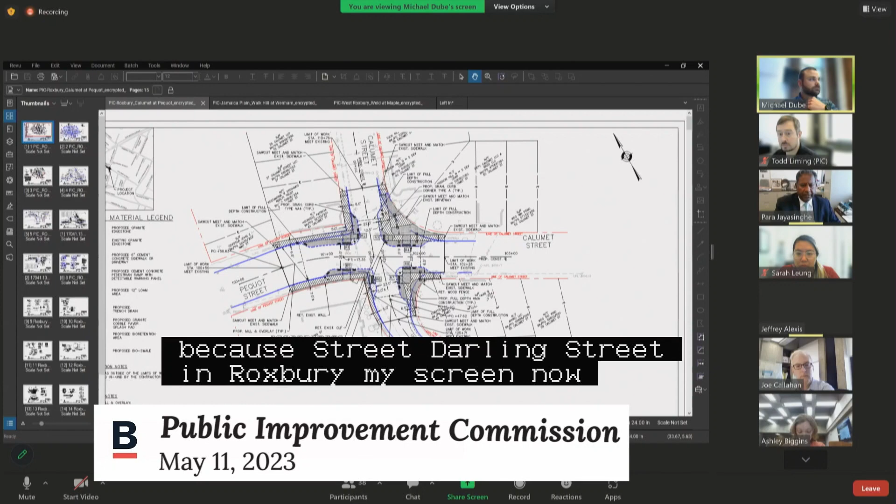Thank you, Jeffrey. Good morning, Commissioners. My name is Mike Dube with GPI, and I'll be presenting the specific repairs for the intersection of Calumet Street, Pequot Street, and Darling Street in Roxbury. I'll share my screen now. Can everyone see my screen? Yes. Perfect. So this project, as Jeff mentioned, proposes to improve pedestrian safety at this intersection by providing curb bump outs that minimize the pedestrian crossing distances and minimize the existing pavement footprint.

Within these curb bump outs, we have additional space for new sidewalks that we're proposing, new pedestrian ramps, green infrastructure with low ground cover and new plantings, and underground lighting infrastructure. These improvements provide a more defined intersection type that promotes safety at the intersection and accessibility for pedestrians. I'll open it up to any questions.

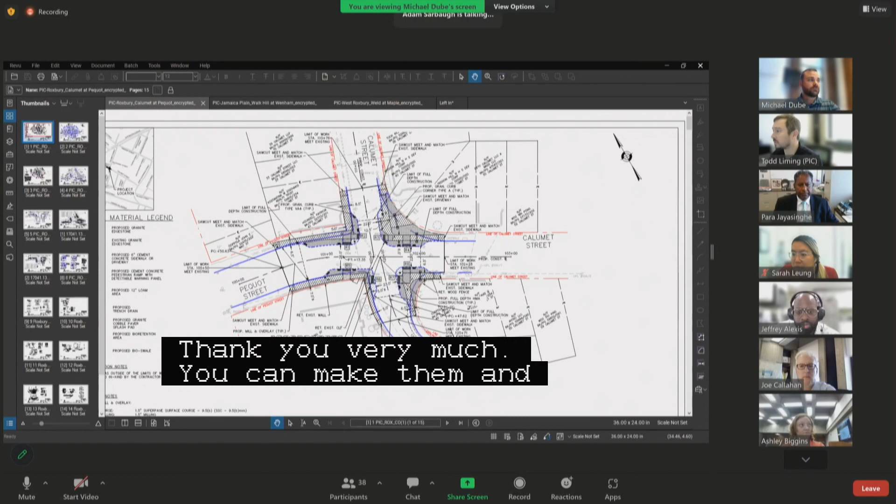Thank you very much, Commissioner. I was trying to wait till it was the public's turn. I'm speaking on behalf of Mission Hill Neighborhood Housing Services at 40 Calumet Street, the extreme low income property you referenced in the presentation. We've sent a couple emails to you, Jeffrey, and only recently reached out to hear about this project. We're respectfully requesting a deferral from any votes so we can have community input, understand how this affects us, and properly address concerns with the Public Works Department. Jeffrey, we did try to email you yesterday, but have not gotten a response back yet.

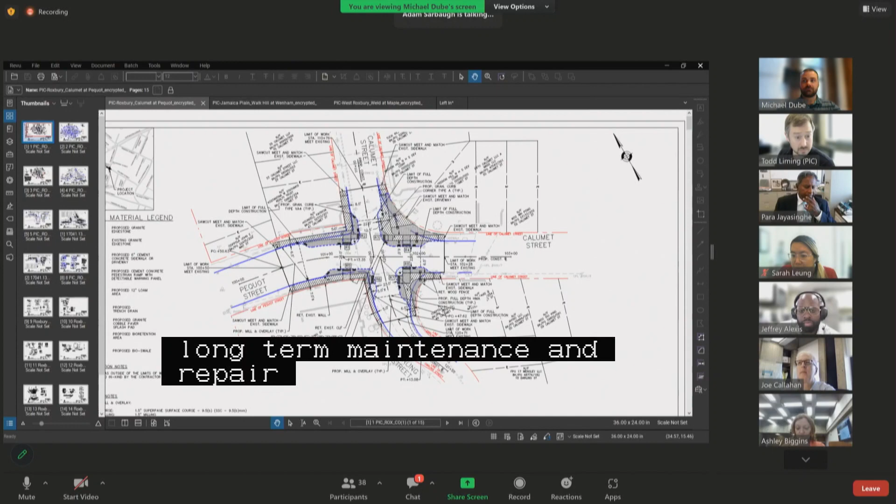Outside of the Neighborhood Housing Services board hat, as a Mission Hill resident, I want to go back to your presentation, Jeffrey, where you mentioned there's been a lot of constituent complaints about this intersection. My overall concern is the follow-up. I understand the intent of this design, but I'm curious what the city's and various departments' commitments are to long-term maintenance and repair. We have a similar example at the other end of Calumet Street, built with double sidewalks and landscaping in the middle, which I've addressed on numerous occasions since around 2017, maybe 2019 - the sidewalks were not getting shoveled because nobody knew whose responsibility it was. Parks took it on as a favor, but they won't commit to it in writing. So I'd like the commission to make sure, as we go through this, that everyone's follow-up responsibility is clearly addressed and committed once this is discussed and presented again.

So again, we really appreciate a deferral so we can have a community process with the Public Works Department. Thank you. Thank you, Adam. Allison, I believe you are next.

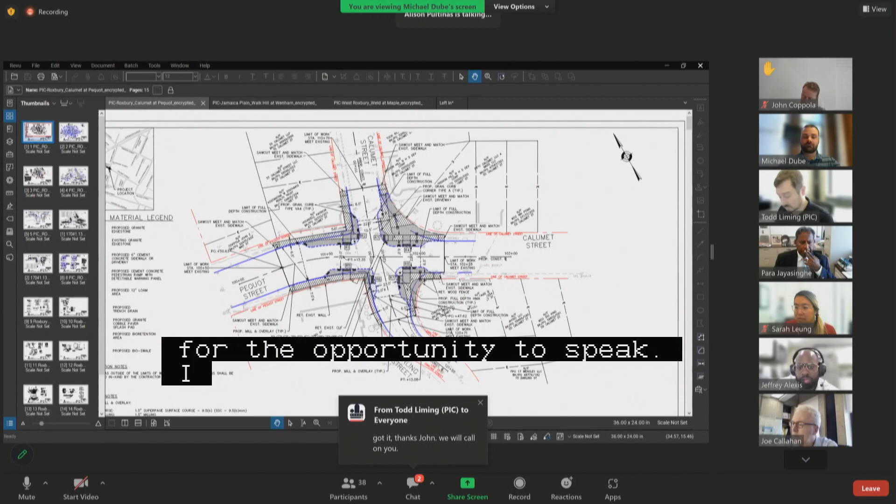Yes, hi, hello everyone, thank you for the opportunity to speak. I did become aware of these plans only recently and reached out to the Mayor's Office of Neighborhood Services to ask for more details. Green infrastructure is wonderful, but my concern would be who is responsible for maintenance and management. I just learned recently that with the Audubon Circle green corners at Park Drive and Beacon, the neighborhood association has to spend $15,000 a year to keep up those plants. So that is a big concern for me.

I am curious whether this will continue to be a four-way stop, and how that works with the sharp corners now for turning vehicles, and exactly where, if any, crosswalks will be painted. Thank you, Allison.

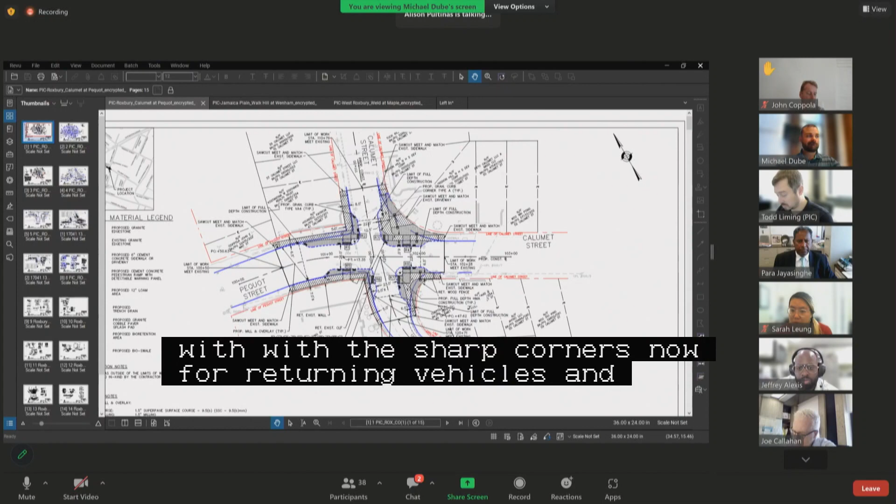Let me take your questions one at a time to the best of my knowledge. Your first question, Allison, was who is going to maintain the green infrastructure. I believe I can speak on behalf of the administration and the new team person managing this, Ms. Kate England - the city is going to maintain the green infrastructure. Unlike episodes in the past, where we had to rely or lean on the communities to help us, the city now has an active program to do the maintenance of green infrastructure. So that's good news.

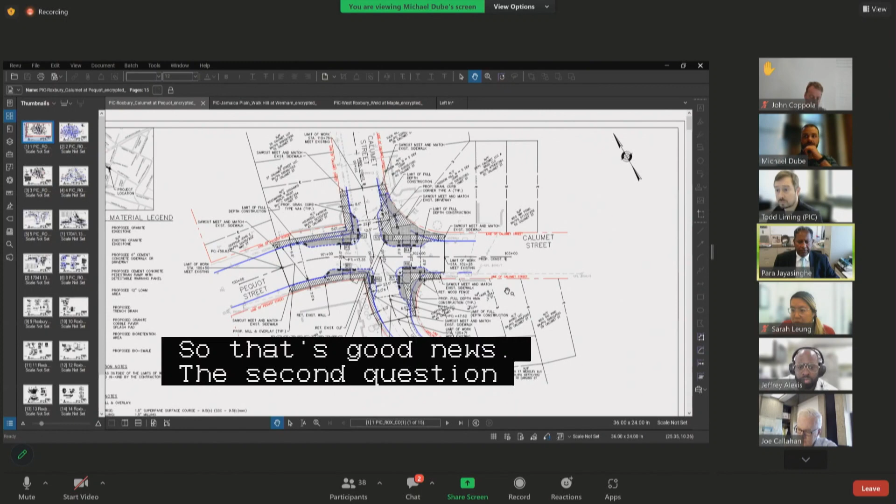The second question is whether this continues to be a four-way stop sign. I believe it is, but I will check with my design engineers to verify that. You can also show the crosswalk design, because I remember seeing that. Michael, could you respond to those two questions?

Yes, I can. So the design does propose to maintain the four-way stop. If you give me one second, I can pull up the striping to show the crosswalk locations. In general, the crosswalks will align with each of the new pedestrian ramps, labeled R1, R2, R3, R4. Within this set we just don't have the striping, so let me try and pull that up for you. So this is the intersection with the crosswalks shown. Thank you very much, Para.

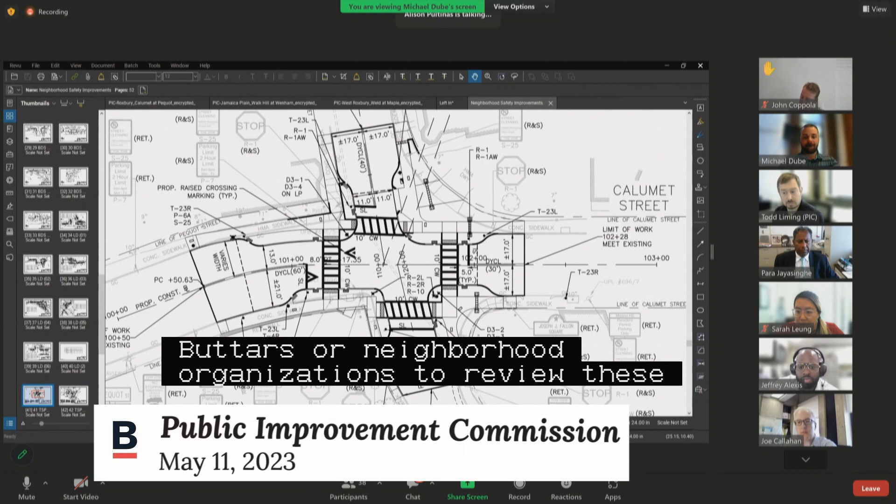I do want to say that there has been no public meeting with the abutters or neighborhood organizations to review these plans, so if possible I would ask Public Works to defer the vote. Also, Para, could you clarify what city department will be responsible for the planting maintenance - is that Public Works or would that be Parks? It's definitely not Parks, Allison - we have a new entity within the Streets Cabinet.

Within Jascha Franklin-Hodge, who is our Chief of Streets, it is embedded within the Streets Cabinet, a program that is looking to the deployment of green infrastructure, both from the design and maintenance standpoint. So I am confident to say, Allison, that it is in very good hands.

It is not just sound bites, this stuff is actually happening. And I hear your concern for a more robust public engagement, loud and clear.

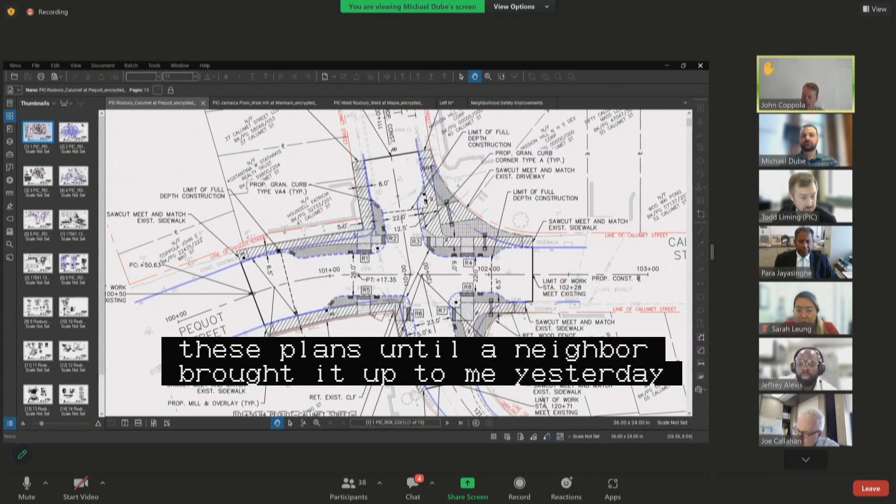I was kind of surprised as a direct abutter that I never received any information on these plans until a neighbor brought it up to me yesterday. That was the first I've seen, and I would like to request a deferral on a decision on this until we could spend a little bit of time on the plans.

I'm not in disagreement with them as a whole, but I would like to be able to have more than a few hours notice to be able to look at them and digest the work that is proposed.

I've seen some of this work by the city done very successfully, and I've seen other parts where they truly provide a danger to pedestrians, create issues with snow plowing and snow removal, and have long-time maintenance issues that the property owners, abutting property owners, have to take the place and do the upkeep on.

So that's, I guess I appreciate a deferral if possible.

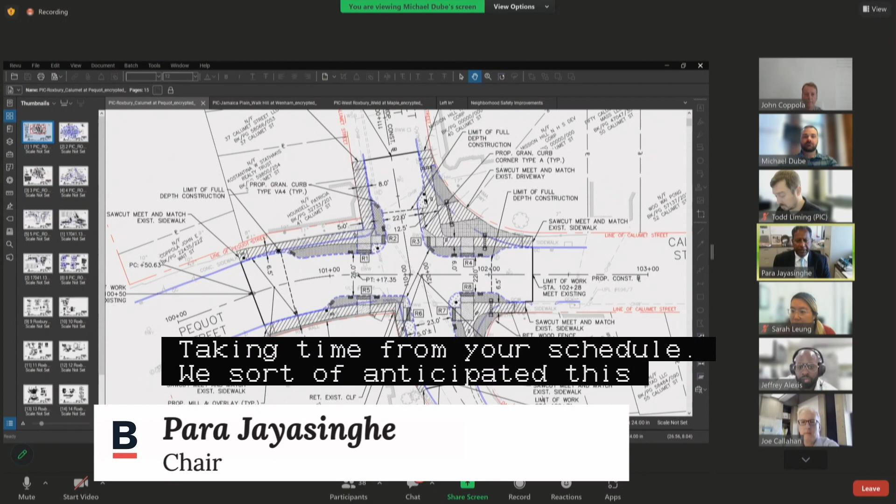Thank you, John. So here are my thoughts. First of all, Adam, Alison, John, I truly appreciate you joining us this morning, taking time from your schedule. We sort of anticipated this scenario, and I will take responsibility for the degree of outreach. It is not due to a lack of effort on our part, but it is the results that we all should be focusing on.

So here's what I recommend, if it is to be agreed by all the fellow commission members. We would like to host a Zoom meeting, okay? And with your agreement, yours meaning Adam, John, and Allison, we'd like to schedule this for May 23rd, and that would be a Tuesday.

May 23rd. I would prefer if we could do it a little bit sooner, but staff availability is making things a little bit challenging. So Tuesday, May 23rd, 6 p.m. We want to have a more engaged conversation per your request. It'll be a Zoom online meeting, as this is a public hearing.

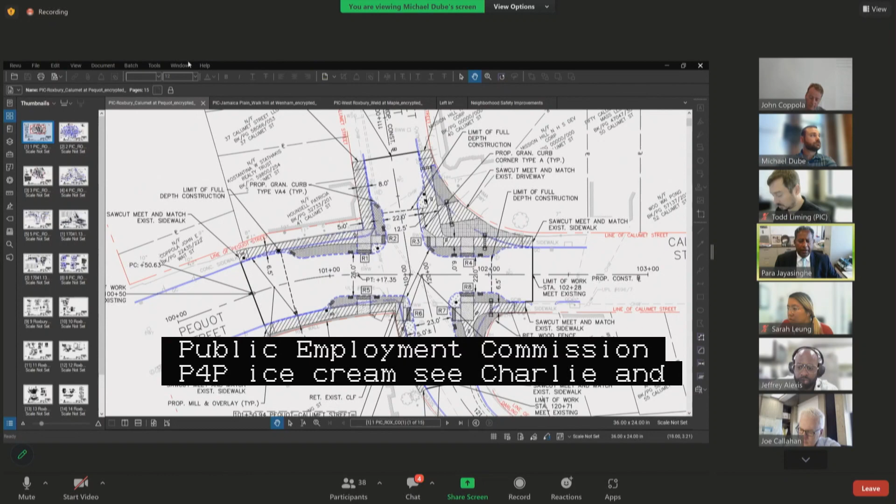And what I would like you to do is to send us your email address. I'm going to give you 2 email addresses. One is a very short and precise email address. It is PIC for Public Improvement Commission. P for Peter, I for ice cream, C for Charlie, at boston.gov. I will also give you my staff person Jeffrey Alexis's email, but I think PIC at boston.gov should be very precise.

Now, if you could be ever so kind and send us an email to that address, this way Jeffrey can email you directly with the Zoom link for Tuesday, May 23rd at 6 p.m., with the full intention of hearing your concerns, explaining this design in more detail, which will allow us to have that conversation. This will require us postponing the public hearing until the next proper hearing, because we have a hearing on the 25th, which is just 2 days after our Zoom meeting.

I would prefer to postpone this for 5 weeks, which is the following subsequent PIC hearing of June 25th. Does that arrangement work for those who've taken time from your schedules? And John, I will ask you first, and I'll go in reverse order. Does that work for you, John?

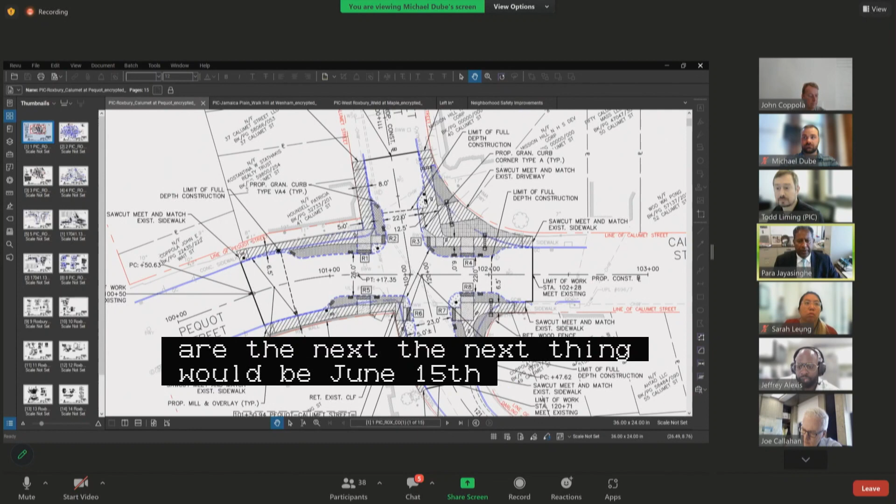Sorry to cut in, but the next hearing would be June 15th, not the 25th. Yes, yeah, that way, sorry, did I mess up? June 15th. So John, does that work for you?

That does, and I do appreciate the opportunity to be able to look at these plans and work with the city for a positive improvement to this intersection. Thank you, John.

And when we share the Zoom link with you, after you send us your email address, please feel free to share it with your abutters or your neighbors. So next is Allison. Allison, does that work for you?

Yes, thank you, and I will share it with others. Thank you, Allison. I truly appreciate everything that you do in our neighborhoods. And Adam, Mr. Sabor, does that work for you, sir?

Yes, I appreciate you hearing us and deferring it so that can happen. We will also work with Allison and John to address some of the topics for that meeting, so it's not a blind meeting for you guys. We can give you some of the topics, concerns, or comments that have come out so we can make it a productive Zoom. Thank you very much for that.

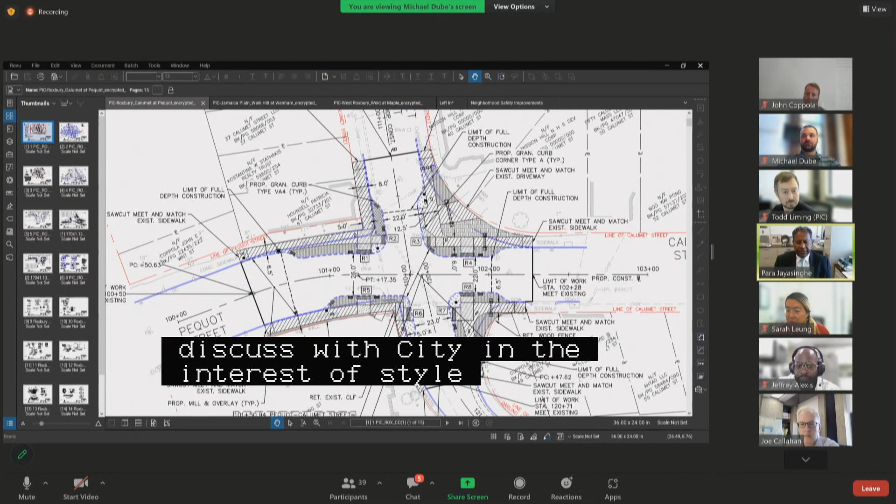So I'm going to ask a small favor. This meeting, which we are proposing for May 23rd, as much as there may be many things you all want to discuss with the city regarding staff allocation and resources, I would appreciate if the focus of the meeting can be towards this public hearing. We will make sure a representative from the Mayor's Office of Neighborhood Services is there to follow up on your broader issues. I just want to keep moving forward with this task, because as someone said, it is in need of attention, and we are eager to implement the steps needed to address it.

So, I'd like to hear a motion to continue this public hearing for 5 weeks to June 15th. I'll make a motion to continue public hearing item number 1 till June 15th. Second. All in favor? Aye. Anyone opposed or abstained? Hearing none, motion passes. Again, my appreciation to Adam, John, and Allison for joining us today.

Moving on to public hearing number 2, on a petition by the City of Boston Public Works Department for specific repairs within public ways in Jamaica Plain, consisting of curb realignment, roadway and sidewalk reconstruction, new and relocated pedestrian ramps, street lighting infrastructure, street trees, storm drain infrastructure, landscaping, green storm water infrastructure, and raised crosswalks, specifically at Walk Hill Street at Wenham Street. This was brought under new business on April 27th of this year, as shown on plans entitled City of Boston Public Works Department Engineering Division Specific Repair Plan, Walk Hill Street at Wenham Street, Jamaica Plain, 12 sheets dated April 20th, 2023.

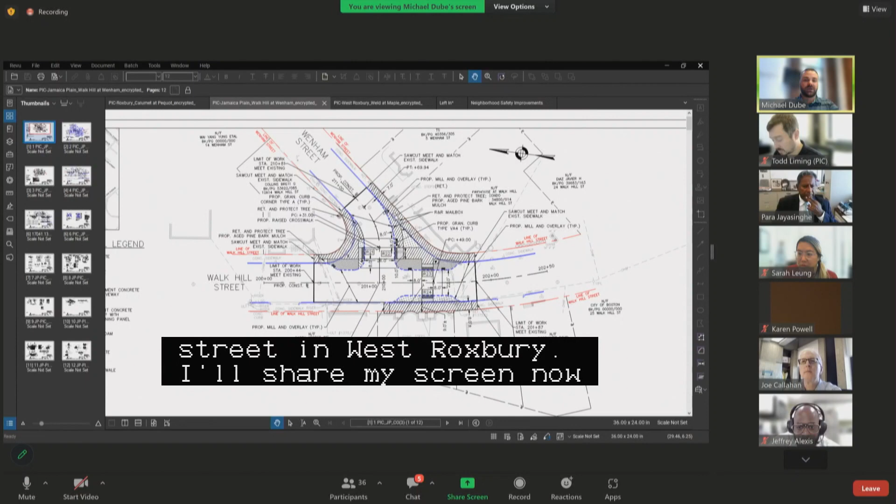This project proposes to improve pedestrian safety and overall safety at the intersection by minimizing crossing distances through proposed curb bump outs on either side, which also minimize the total pavement width. This design also proposes new cement concrete pedestrian ramps, new cement concrete sidewalks, and raised crossings for traffic calming and pedestrian safety. The additional space within the proposed curb bump outs will be used for green infrastructure with plantings and low ground cover, and we're also proposing new lighting infrastructure aligned with the new curb lines. Overall, these improvements will provide a safer intersection design. I'll open it up for questions or comments.

Thank you, Michael. Any questions by fellow commission members?

Hearing none. Any concerns or comments by PIC staff? No issues here. I'll give the public a minute in case anyone wants to weigh in. Thank you, Mr. Liming. Any comments by members of today's audience? As Mr. Liming mentioned, you can use the raise hand feature.

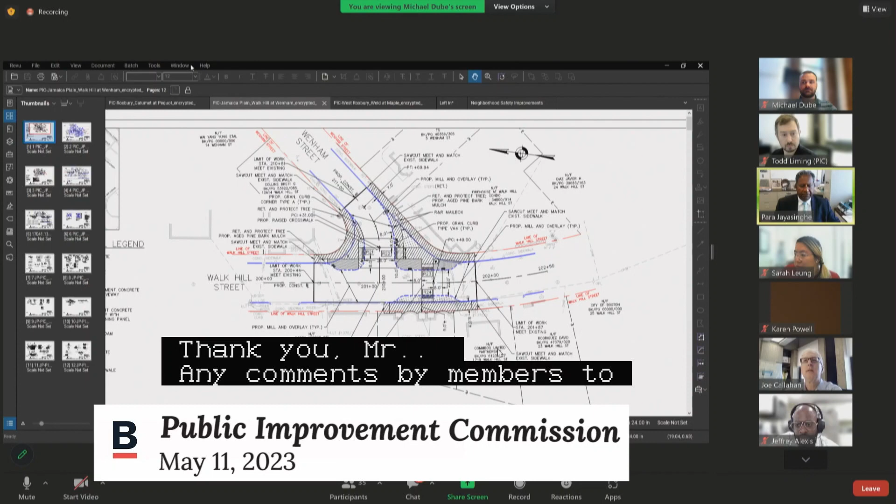Seeing or hearing none, I'd like to hear a motion regarding public hearing number 2. I'll make a motion to approve a petition by the City of Boston Public Works Department for the making of specific repairs in Walk Hill Street and Wenham Street as read into the record by the chair. Second. All in favor? Aye. Anyone opposed or abstained? Hearing none, motion passes.

Public hearing number 3 on a petition by the City of Boston Public Works Department for the making of specific repairs within the following public ways in West Roxbury, consisting of curb realignment, roadway, sidewalk, and driveway curb cut reconstruction, as well as new and relocated pedestrian ramps, street lighting infrastructure, storm drain infrastructure, street trees, landscaping, green stormwater infrastructure and raised crosswalks. Weld Street at Maple Street at Pomfret Street. This was brought under new business on April 27th of this year, as shown on a set of plans entitled City of Boston Public Works Department Engineering Division Specific Repairs Plan, Weld Street at Maple Street, West Roxbury, 19 sheets dated February 9th of 2023.

Jeffrey? Yes, thank you. Once again, good morning, everyone. Chairman, members of the commission, my name is Jeffrey Alexis, Public Works Engineering, petitioning for the specific repairs at the intersection of Weld Street at Maple Street and Pomfret Street. Also joined by our design consultant from GPI, who will provide a little bit more background information on this project.

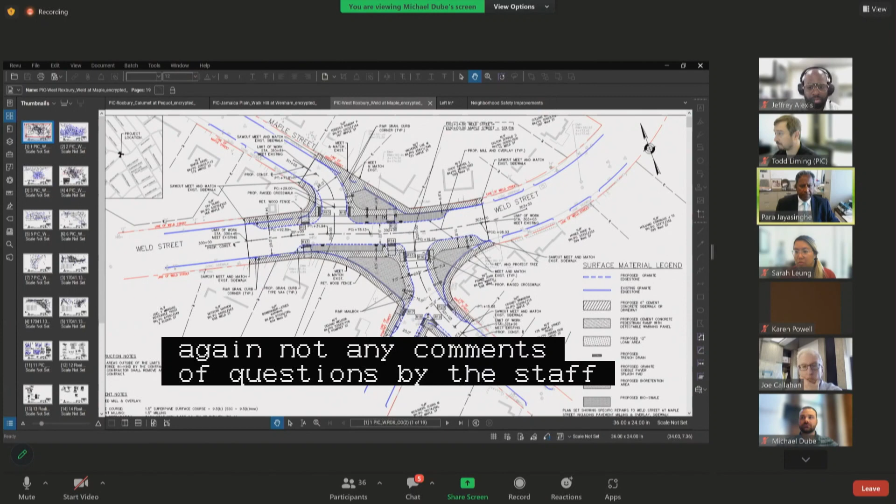Thank you, Michael. Any comments or questions by fellow commission members? Hearing none, any comments or questions by PIC staff? All set. Any comments by members of today's audience? Seeing none, Jeffrey and your team, I applaud you all for doing these type of improvements so that the livability of our neighborhoods is improving, and I commend you all for this type of work.

I'd like to get a motion regarding public hearing number 3. I'll make a motion to approve a petition by the City of Boston Public Works Department for the making of specific repairs in Weld Street, Maple Street, and Pomfret Street as read into the record by the chair. Second. All in favor? Aye. Anyone opposed or abstain? Hearing none, motion passes.

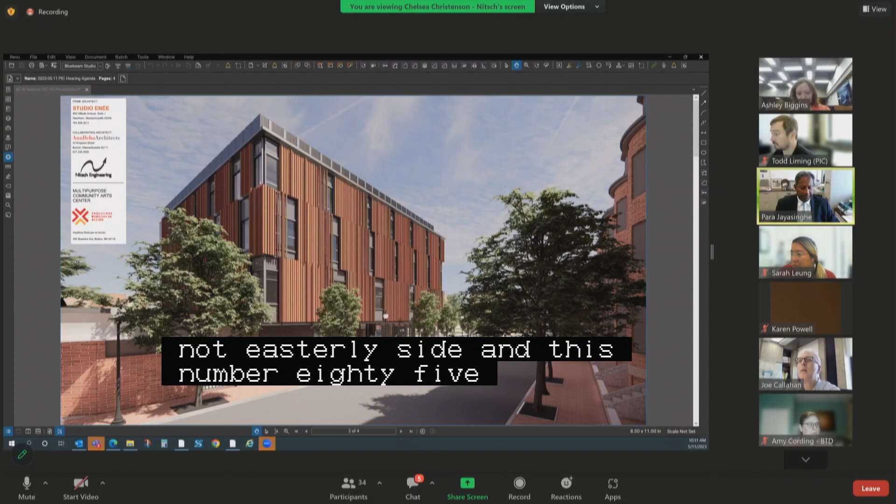Public hearing number 4 on a petition by IBA Real Estate Support Corp for the acceptance of a pedestrian easement adjacent to West Newton Street, which is a public way, Boston proper, located on its northeasterly side at address number 85, generally southeast of Tremont Street. This was brought under new business on April 27th of this year, as shown on a plan entitled City of Boston Public Works Department Engineering Division Pedestrian Easement Plan 85 West Newton Street Public Way South End, one sheet dated April of 2023. Good morning. If the petitioner can identify and introduce themselves.

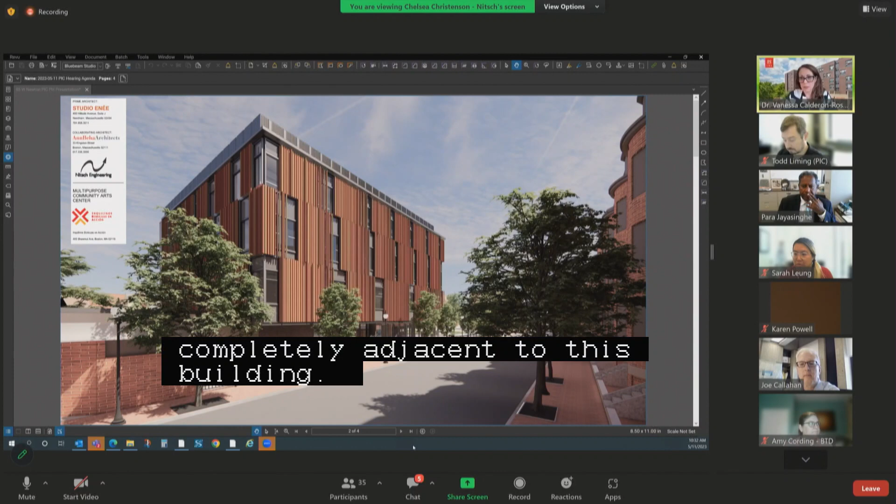My name is Vanessa Calderon Rosado, Chief Executive Officer of IBA, Inquilinos Boricuas en Acción, the owner of the property and the proposed project we're presenting today. IBA is a nationally recognized community development corporation. We own 667 units of affordable housing, primarily in the South End in the Villa Victoria community, completely adjacent to this building, where the proposed programs and services housed in this building, which we call the CASA, Center for Arts, Self-Determination and Activism, will directly benefit the low-income families that live in our properties, as well as benefit the larger South End neighborhood and City of Boston by providing affordable art space for artists, as well as community gathering spaces.

Here today we have Chelsea Christenson from Nitsch Engineering and Michael Schambacher from Studio ENÉE, one of the architects on the design team for this project. Let me turn it over to them for the presentation, and thank you for your time. Thank you, Vanessa. Good morning, Chelsea Christenson from Nitsch Engineering on behalf of IBA Real Estate Support Corp.

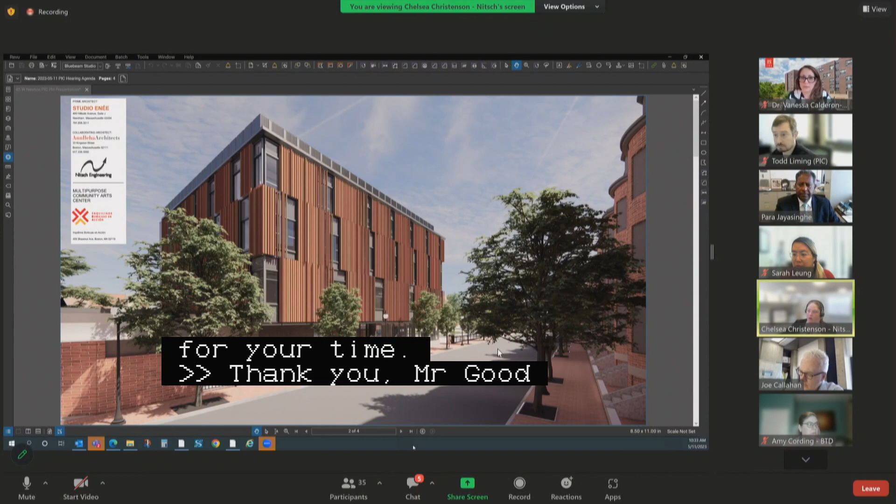The pedestrian easement we are requesting is associated with sidewalk improvements along 85 West Newton Street, as shown here. Our site is located on this currently vacant lot between Tremont Street and Shawmut Avenue along West Newton Street. The pedestrian easement itself is a little less than 4 feet wide along the length of the proposed building. We have since added a section showing where the easement line lands relative to the property line and the proposed building. So there is an overhang within the easement, but not over the property line.

Any questions for Ms. Christenson or Chelsea by fellow commission members? Hearing none, any comments or questions by PIC staff? All set. Thank you for adding that detail to the plan, Chelsea. Any comments by members of today's audience?

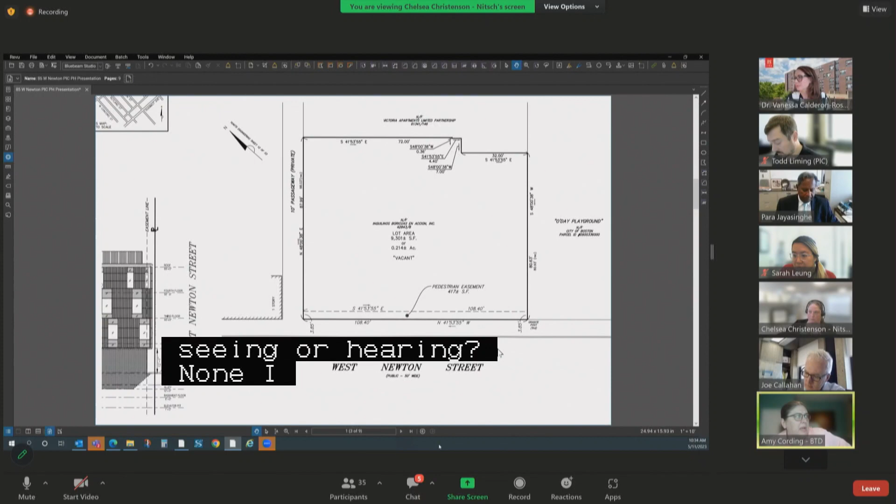Seeing or hearing none, I'd like to hear a motion regarding public hearing number 4. I'll make a motion to approve a petition by IBA Real Estate Support Corp. for the acceptance of a pedestrian easement on West Newton Street, as read into the record by the chair. Second. All in favor? Aye. Aye. Anyone opposed or abstain? Hearing none, motion passes. Public hearing number 5 on a petition by IBA Real Estate Support Corp.

For the making of specific repairs within West Newton Street, a public way, Boston proper, located on its northeasterly side at address number 85, generally southeast of Tremont Street, consisting of sidewalk reconstruction, as well as new and relocated specialty pavement, street lighting infrastructure, street tree pits, and bike racks. This is brought under new business on April 27th of this year, as shown on a set of plans entitled City of Boston Public Works Department Engineering Division, Specific Repair Plans 85 West Newton Street, Public Way South End, 2 sheets dated April of 2023.

Thank you again, Mr. Chairman. This is Vanessa Calderon again on behalf of IBA. I will turn it over to Chelsea. Thank you, Vanessa. Chelsea Christenson, Nitsch Engineering on behalf of IBA Real Estate Support Corp.

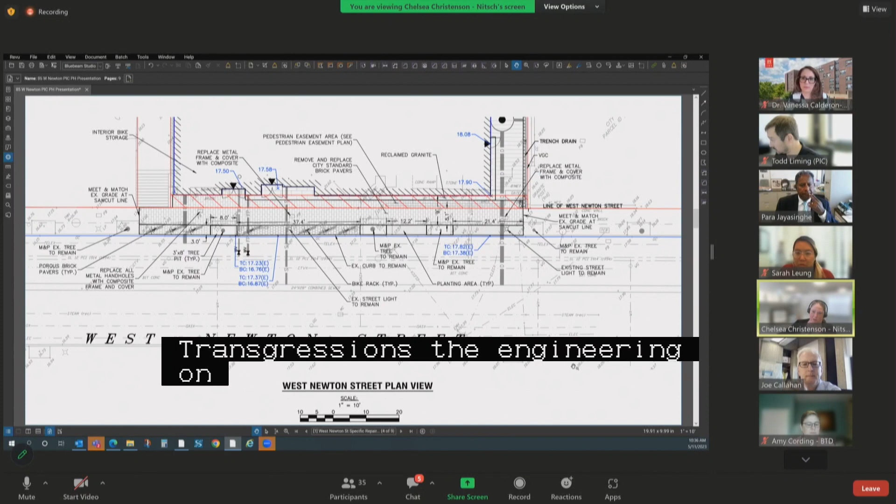Our proposed specific repairs include reconstruction of the existing brick sidewalk using city standard brick material, a porous brick strip along the westernmost frontage zone, including new bike racks. Since the new business meeting, we have angled the bike racks to allow more space for green infrastructure. So the current plan proposes these areas between the tree pits along the east side would be planted green infrastructure, and we'll continue to work with Kate England on what exactly that material will be. I should have mentioned earlier, this is O'Day Playground over here, and so we thought the best place for the greenery would be closer to that area of the playground.

Existing trees and existing streetlights will remain, and here you can see the pedestrian easement that was discussed in the previous action. Thank you, Chelsea. Any questions for Ms. Christenson by fellow commission members?

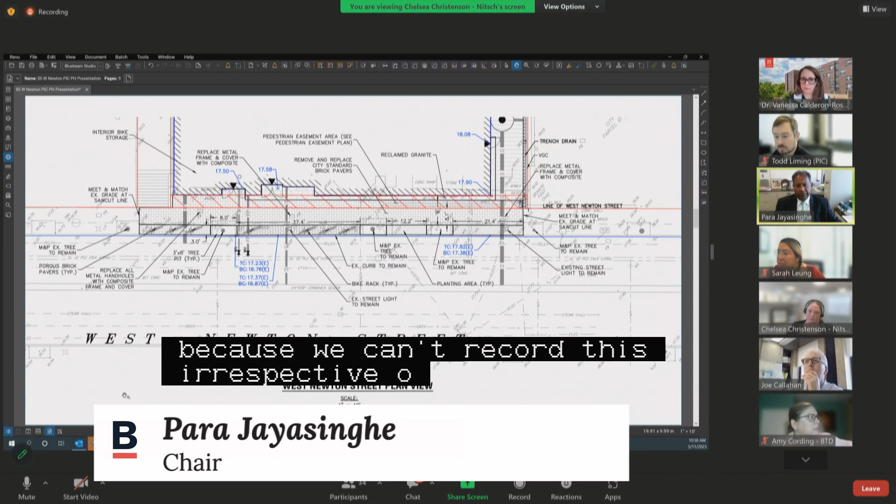Any comments by PIC staff? No, all set. Any comments by members of today's audience?

Hearing none, I'd like to hear a motion regarding public hearing number 5. Make a motion to approve a petition by IBA Real Estate Support Corp for the making of specific repairs within West Newton Street as read into the record by the chair. Second. All in favor? Aye. Anyone opposed or abstain? Hearing none, motion passes. Thank you, Vanessa.

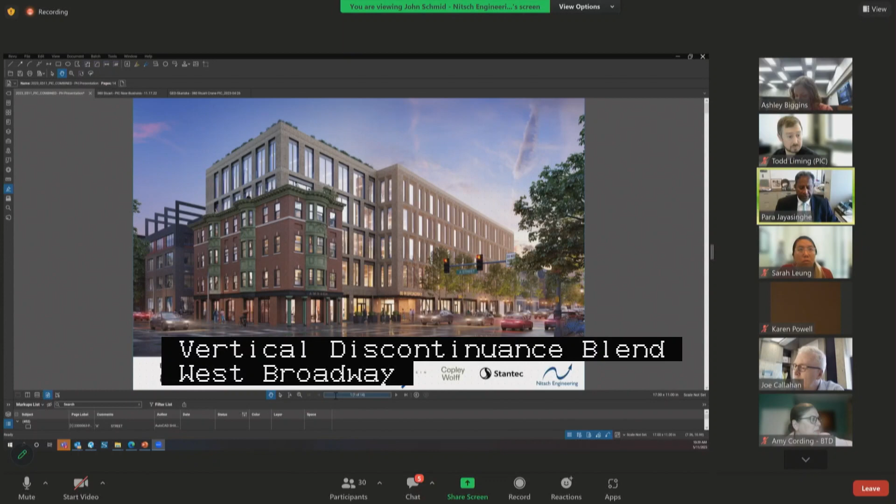We want to give a brief introduction to the project. I know we met with you guys two weeks ago, but we'll give an introduction for those who weren't at that last meeting. West Broadway is a 5-story office building, and we are also keeping the existing facade of the Amrheins building on the west and south side. We also have activation on the ground floor with some mixed use, and we're hoping to retain the Amrheins restaurant on the southwest side of the building. We also have a proposed tenant that will go in the center of the building on the ground floor. We have a small parking garage, about 23 spaces, on the southeast side of the building, and we're about 87,000 square feet of gross floor area as a mixed-use office building to revitalize this neighborhood.

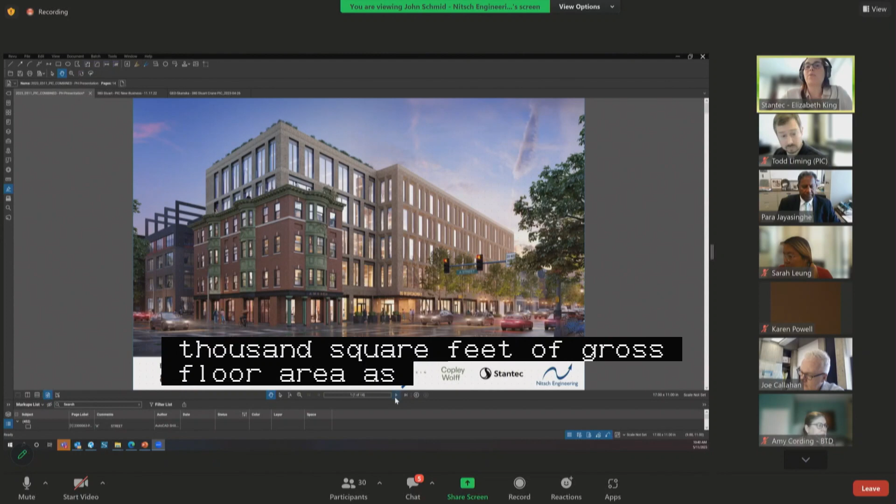We're doing some significant repairs to the pedestrian and public realm streetscape as well. We're also providing an 800 square foot community space on the ground floor, and we're targeting LEED Gold for this project. One of the big drivers for our client team is really striving to think about embodied carbon and carbon analysis for the building, and we're going with a full mass timber structure. That's something the client is passionate about, and we as a team are really excited about for the city of Boston.

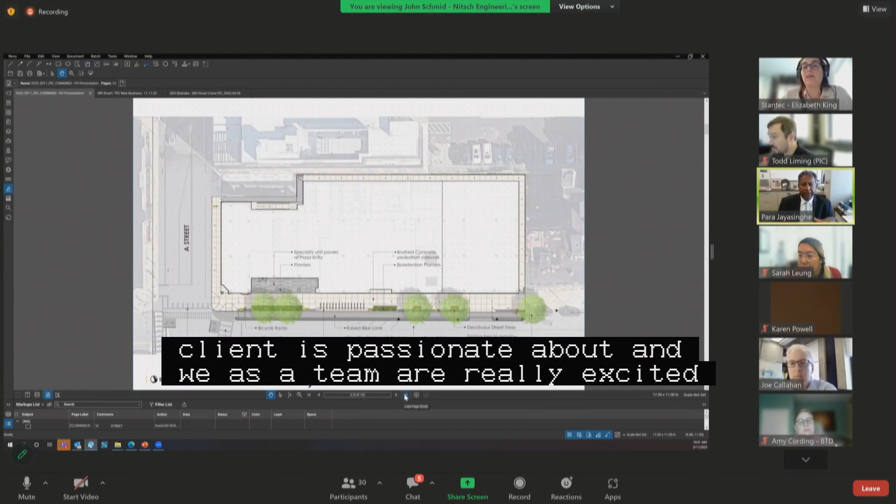I'm going to hand it over to the next slide, where our Copley Wolff landscape architect will walk through the site materials. Elizabeth, if you could ask your team to just focus on the vertical discontinuance part, and then we can pick up the rest of the stuff, because there are multiple hearings associated with your project.

Good morning, John Schmidt with Nitsch Engineering. I'll speak to the vertical discontinuances. They are required in order to provide space for the existing facades that are being retained and reconstructed for this construction, as you saw in the initial visual. These are the existing projections over the public way, and they are being maintained for the redevelopment of this parcel. The facades are greater than 30 feet above grade. Essentially, that's the gist of it. The appraisal is underway and being reviewed, and it should be completed shortly.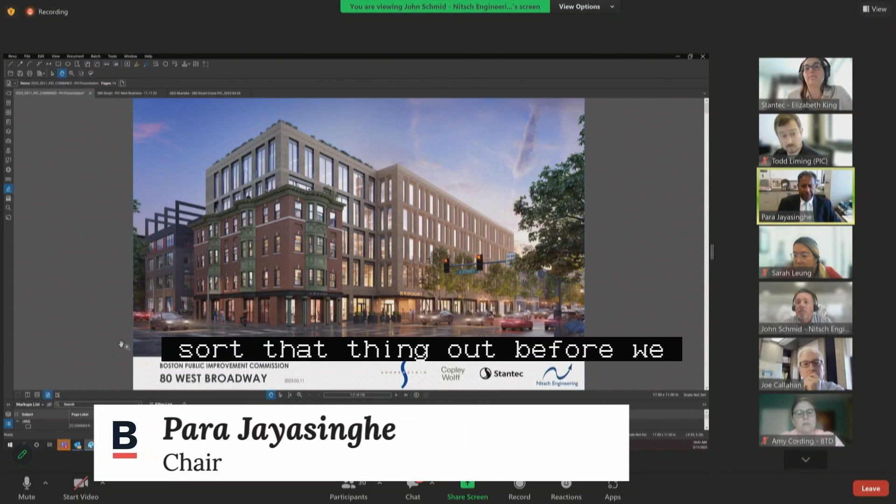Thank you, John. If the team recognizes that we need to finalize that appraisal before we can file these with the registry, so independent of how the hearing goes, hopefully you can convey to the client that we need to sort that out before we can take final action on recording this. John, that's understood, right? Yes, I believe so. There have been numerous emails this morning, and we understand that the project cannot proceed further until the appraisal has been worked out between both parties.

Awesome, thank you. Any questions or comments by fellow commission members regarding the discontinuance portion of this hearing? Hearing none. Any comments by PIC staff?

No, all set, thanks. Any comments by members of today's audience? Seeing or hearing none, I'd like to hear a motion regarding public hearing number 6.

I'll make a motion to approve a petition by 80 West Broadway Operator LLC for the vertical discontinuance of portions of West Broadway and A Street as read to the record by the chair. Second. All in favor? Aye. Anyone opposed or abstain? Hearing none, motion passes.

Moving on to public hearing number 7 on a petition by 80 West Broadway Operator LLC for the making of specific repairs within the following public ways in South Boston, consisting of curb realignment, roadway and sidewalk reconstruction, as well as new and relocated pedestrian ramps, specialty pavement, street lighting infrastructure, street trees, landscaping, irrigation infrastructure, green stormwater infrastructure, storm drain infrastructure, bike racks, driveway curb cuts, and protected bike facilities. All of these on West Broadway at address number 80, generally southeast of A Street, generally northeast of West Broadway.

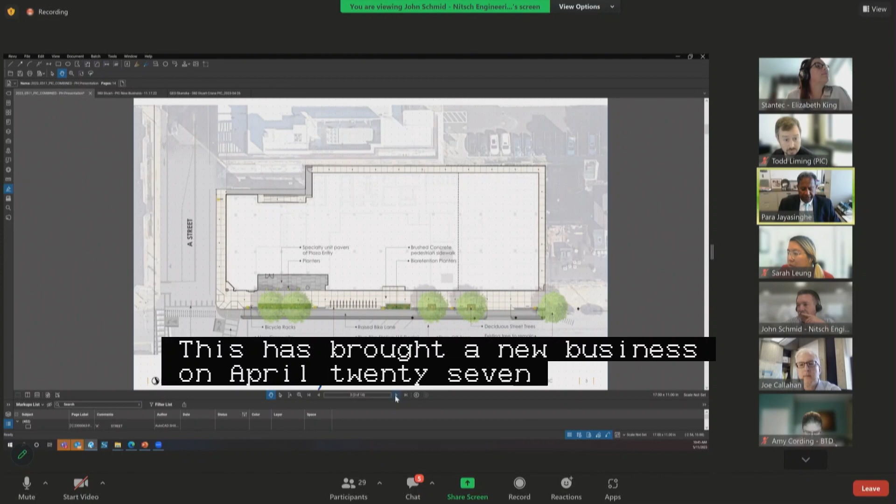This was brought under new business on April 27th of this year, as shown on a set of plans entitled City of Boston Public Works Department Engineering Division Specific Repairs Plan, A Street, West Broadway, 80 West Broadway, South Boston, 4 sheets dated May 4th of 2023.

Petitioner? John Schmid with Nitsch Engineering. I think this is the opportunity for the landscape architect to speak to the improvements proposed within the public ways. Thank you, John.

Perhaps he's not here. Did we lose somebody? I think he's just signing on now, actually. Andrew Arbaugh, correct? Just give... Correct. Yep. Welcome, Andrew, you're up. I think he might be having audio problems, so we can speak to this for Andrew. Sorry, dropped there, out he is, at the least opportune moment ever. No, Andrew, you're good, you're good.

Thank you so much. The landscape and streetscape plan, as shown, includes a raised cycle track along West Broadway, a permeable paver strip with a raised permeable paver strip at the back of the raised bike lane, 2 bioretention planters including 2 trees in the first one and 2 trees in pits also in the streetscape itself, and a 15-dock Blue Bike station. The paving is brushed concrete at the back of the paving strip along West Broadway, and that continues around the corner on A Street as well.

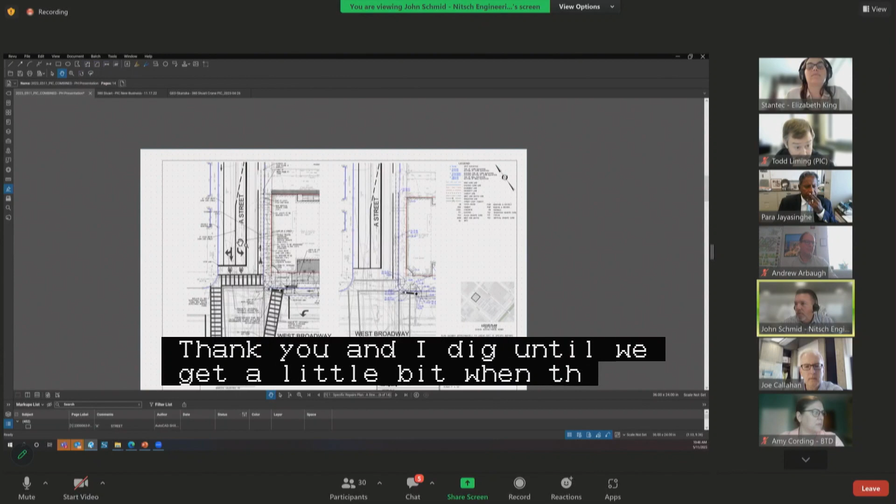Thank you, Andrew. I'll dig into the weeds a little bit with the design. Along A Street, we are maintaining a 7.5-foot wide concrete sidewalk, and the sidewalk can't get any wider because of the existing building facade being retained. There was a conversation at the new business hearing about providing an accessible ramp on the opposite intersection, and it's our understanding that this receiving ramp is under reconstruction by the developer of this parcel, which is 79 to 89 West Broadway, and I also understand that they may have gotten a variance to keep the ramp as an apex.

So this intersection is being addressed by the developer across the street. There was also conversation about the existing catch basin being within the ramp here, so that catch basin has been converted into a drain manhole, and the catch basin is being proposed at the apex of the intersection, which is the low point. Denise, there is no dump plaque indicated on this plan, but there will be when Mylars are submitted.

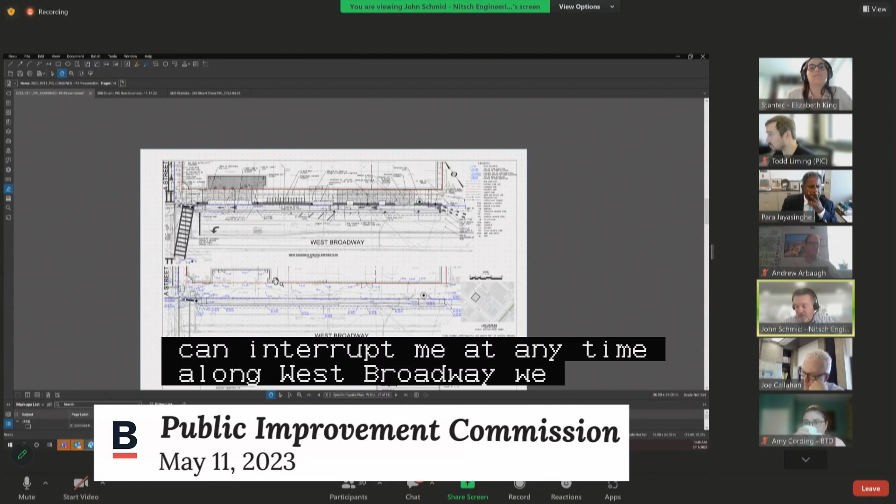So if there's any questions, I'll move on to the next street, and you can interrupt me at any time. Along West Broadway, we have a 10.5-foot wide concrete sidewalk, a 4.5-foot wide furnishing zone consisting of pavers and 2 bioretention areas, bike racks, street lights, street trees, as well as the elevated bike lane through here. As we go to the next sheet, actually that's it, there's 2 streets on this project.

Thank you, John. A question for your team on the status of the maintenance agreement. Elizabeth, can someone chime in on that front? Yeah, so I know that our team, our legal team, Jared Agerman and Shorenstein team, have been talking with Chong about the drafted LMI language, so there is a draft of the LMI language. Ms. King, again, to expedite recording of the hearings, we would appreciate you sorting that out and closing it out.

Okay? Sure. Thank you. Any comments by fellow commission members? Yes, can I ask when the variance for the apex reciprocal ramp was granted? I don't know the details on that, I just understand that the receiving intersection — this is what I heard through the project team, and if someone else can speak in greater detail, please do — but I understand that the 79 to 89 project has gotten a variance for this work. Elizabeth, can anyone else speak to more on this? Yeah, I don't actually know the date, Sarah, but we're happy to send you the executed TAPA for that side of the project.

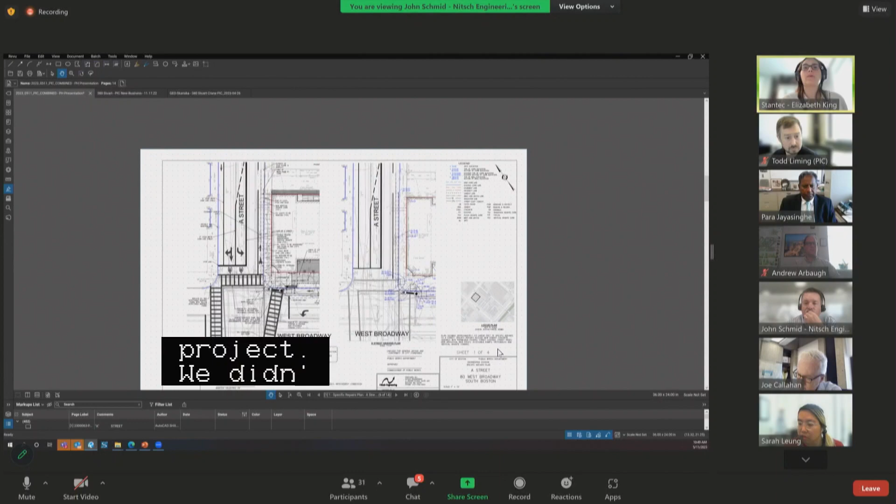So when that project went through this PIC process, that's why the waiver was granted. If I could just get a copy of that variance for our records, I think our concern is that variance was granted on the basis that your development, on that side of the street, was also an apex ramp. So we just want to make sure that since circumstances are changing because the ramp is being split, that variance is still valid.

I'll see what I can find. If I don't find it by the end of this hearing, I'll email it to you. Great, thank you. Sarah, I don't want to talk out of turn, but I see a possibility that the prior variance, as you noted, was granted because of the apex on this side, and now we have an activity on this side which may make that variance null and void. And Elizabeth, if that is the case, are you agreeable to making the necessary changes?

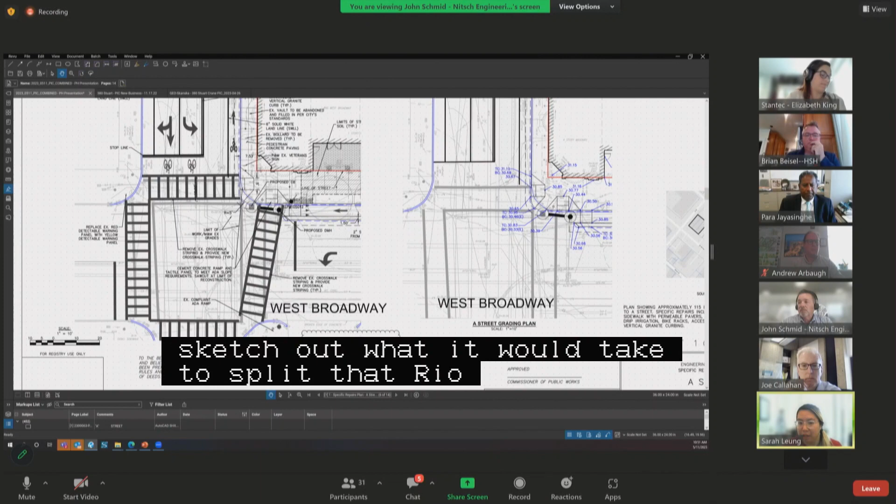I'm not sure, Sarah, how would you carry that out? Would you be asking these team members to redo the reciprocating ramp on the south side? I would have to see the variance and under what circumstances it was granted, because there are many reasons why the AAB may have granted it. But we would ask the team to sketch out what it would take to split that ramp if we found that there might be some wiggle room because of the proponent's project splitting this ramp.

So Elizabeth, do I have some level of assurance that you all will do what needs to be done to manage the situation so that we don't need to delay this hearing? Sure, yes, we will work with the project team. It's an active project, so we can work with that project team.

Brian Beisel from Howard Stein Hudson. Again, I think the variance had less to do with what's on the 80 West Broadway side and more to do with the infrastructure that's in place on the 79 West Broadway side. Okay, yeah, so that's what I want to know. So if you find that paperwork, please send it our way. Thank you. Sure, yeah, we can send it your way.

Thank you, everyone. Any further questions for the petitioners? Hearing none, comments by PIC staff? All set. Thank you, Todd. Any comments by members of today's audience? Seeing or hearing none, I'd like to hear a motion regarding public hearing number 7.

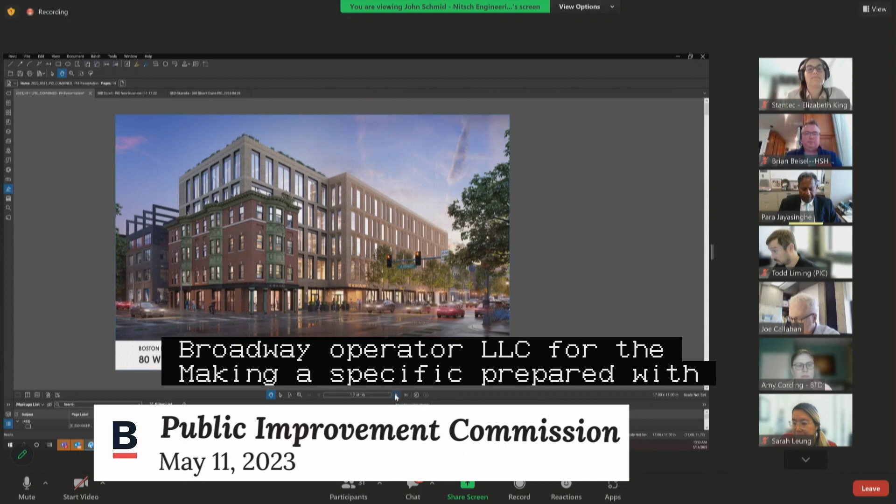I'll make a motion to approve a petition by 80 West Broadway Operator LLC for the making of specific repairs within West Broadway and A Street as read into the record by the chair. Second. All in favor? Aye. Aye. Anyone opposed or abstain? Hearing none, motion passes.

Public hearing number 8 on a petition by 80 West Broadway Operator LLC for the granting of a projection license for the installation of 2 canopies over portions of the sidewalk within West Broadway, a public way, South Boston, located on its northeasterly side at address number 80, generally southeast of A Street. This was brought under new business on April 27th of this year, as shown on a set of plans entitled City of Boston Public Works Department Engineering Division Canopy Plan, 80 West Broadway, South Boston, 2 sheets dated April 20th of 2023.

Good morning, Commissioners. John Schmid with Nitsch Engineering. So as read, here are 2 proposed canopy projections. They are 10.5 feet above grade, greater than 10 feet above grade. They are internally drained and heat traced, and they project 3 feet into the public way, which is less than 2/3 of the existing sidewalk width of about 14.5 feet.

Thank you, John. Any questions for Mr. Schmid by fellow commission members? Hearing none, any comments by PIC staff? Set. Any comments by members of today's audience? Seeing or hearing none, I'd like to hear a motion regarding public hearing number 8.

I'll make a motion to approve a petition by 80 West Broadway Operator LLC for the granting of a projection license in West Broadway as read into the record by the chair. Second. All in favor? Aye. Aye. Anyone opposed or abstain? Hearing none, motion passes.

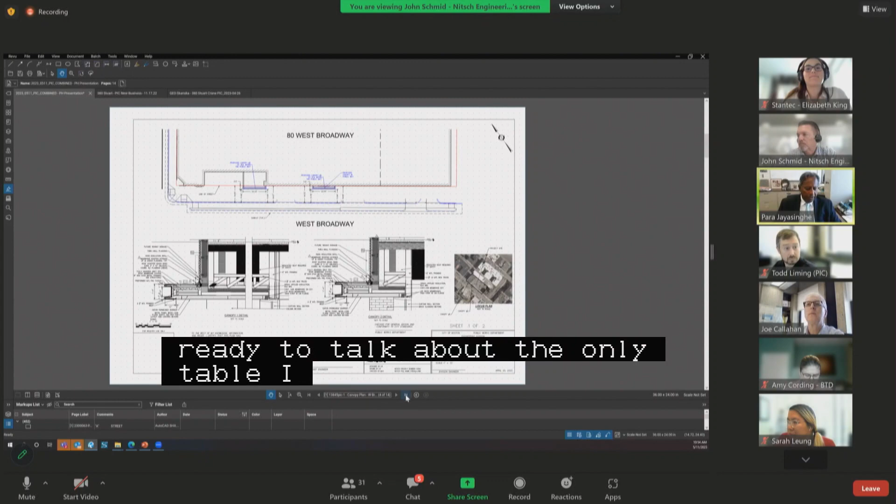Public hearing number 9 on a petition by 80 West Broadway Operator LLC for the granting of an earth retention license for the installation of a temporary earth support system within West Broadway, a public way, South Boston, located on its northeasterly side at address number 80, generally southeast of A Street. This was brought under new business on April 27th of this year, as shown on a set of plans entitled City of Boston Public Works Department Engineering Division Temporary Earth Retention, 80 West Broadway, South Boston, 3 sheets dated January 27th of 2023.

Good morning, Commissioners. John Schmid with Nitsch Engineering. This is the final petition before you for this parcel. As Para read, it's for temporary earth support consisting of soldier pile and lagging along West Broadway. The soldier pile and lagging will be placed approximately 3 feet into the public way, and it will be cut to be 6 feet below the sidewalk elevation upon completion of the project.

Any questions? Thank you, John. I believe at the new business hearing, the height which your piles are supposed to be cut was not noted on the plans, and I hope it is being addressed. If it is not, please amend the plans. Yes, it is noted on note 3.

Brilliant. Thank you, John. Any comments or questions by fellow commission members to Mr. Schmid? Hearing none, any comments by PIC staff? All set. Any comments by members of today's audience? Seeing or hearing none, I'd like to hear a motion regarding public hearing number 9.

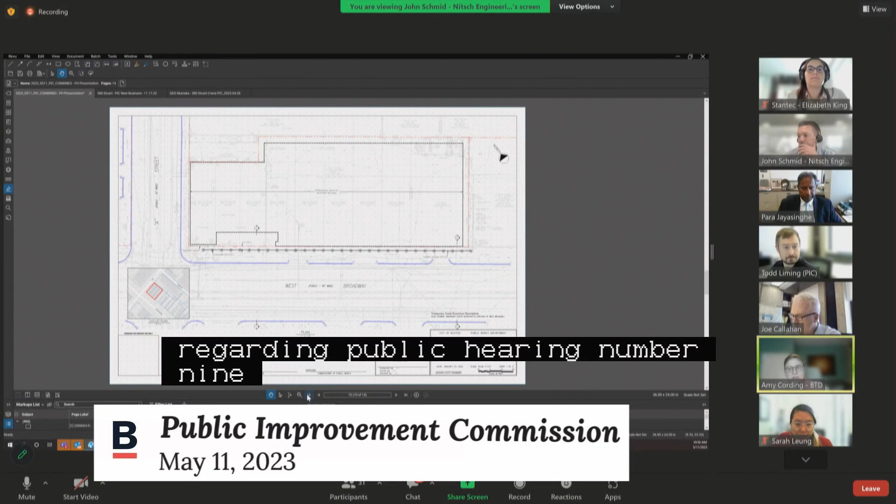I'll make a motion to approve a petition by 80 West Broadway Operator LLC for the granting of an earth retention license in West Broadway as read into the record by the chair. Second. All in favor? Aye. Anyone opposed or abstain? Hearing none, motion passes. Thank you, folks.

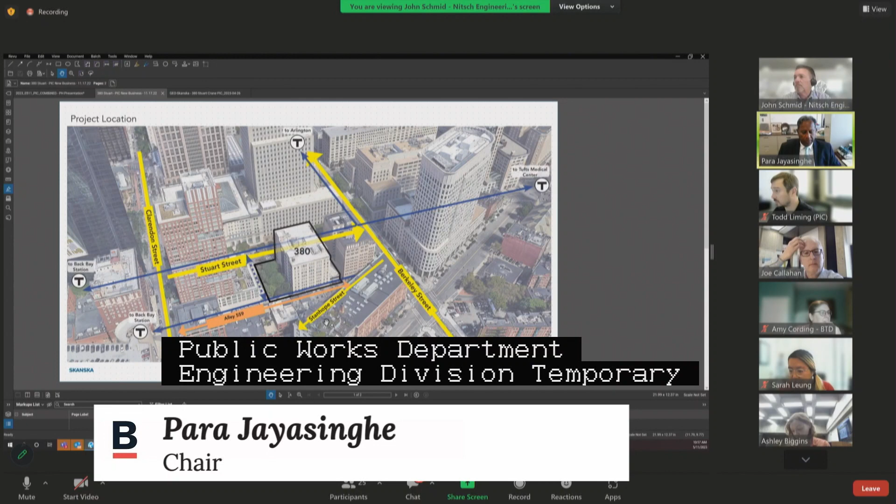Moving on to the last public hearing number 10, on a petition by SCD 380 Stuart LLC for the granting of an earth retention license for the installation of 2 temporary crane pads within Stuart Street, a public way in Boston proper, located on its southeasterly side at address number 380, generally southwest of Berkeley Street. This was brought under new business on April 27th of this year, as shown on a plan entitled City of Boston Public Works Department, Engineering Division, Temporary Earth Retention and Crane Foundation Plan, 380 Stuart Street, Boston, one sheet dated April 26th of 2023.

Good morning, Commissioners. John Schmid here with Nitsch Engineering. With me is Cassandra Silva from Skanska. This is the location of 380 Stuart Street. You may recognize this. It was before the Commission last fall for specific repairs and some other improvements, as well as back in 2017 for support of excavation. What we're here before you today has to do with the construction process of building this multi-level office building.

There is a proposed 2 mats. One is a crane mat, which is 20 by 20, about 6 feet deep on micro piles. The second is a man hoist mat, which is about 8.5 feet by 8.5 feet by 2 feet deep, and it's a slab on grade.

There was some conversation at New Business regarding accessible parking during the construction process that Sarah had raised. I believe the CMP was shared with the team after that meeting, and I understand the client has been working with Sarah, confirming that her needs are met. Any questions? Thank you, John.

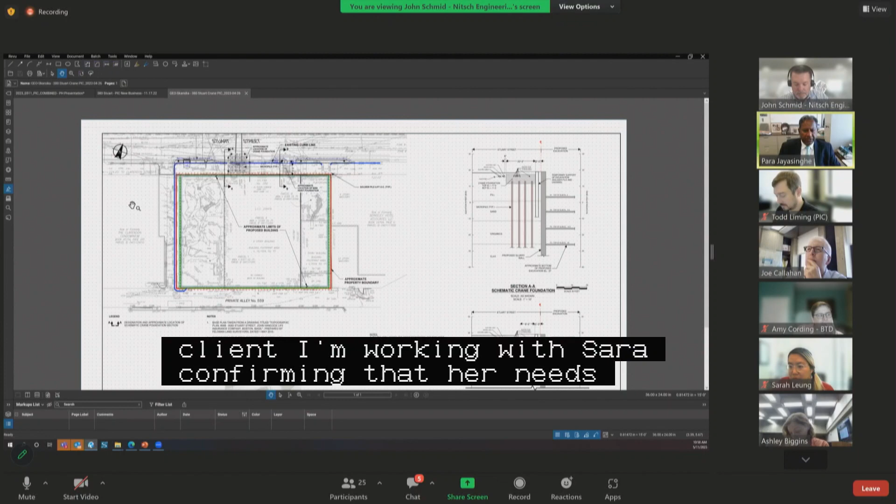Any questions by fellow commission members to the petitioner? Thank you, John. I'm happy to work with you after this hearing to kind of tie up all the loose ends. Thank you, Sarah. Any further comments to the petitioners by fellow commission members?

Hearing none. Comments by PIC staff? All set. Any comments by members of today's audience? Seeing or hearing none, I'd like to hear a motion regarding public hearing number 10.

I'll make a motion to approve a petition by SCD 380 Stuart LLC for the granting of an earth retention license in Stuart Street as read in the record by the chair. Second. All in favor? Aye. Anyone opposed or abstain? Hearing none, motion passes. Thank you. That concludes the public hearing segment of our agenda today.

Now moving on to the new business portion of today's agenda. New business item number 1, 720 William T. Morrissey Boulevard, Freeport Street, Victory Road, Dorchester, specific repairs on a petition by the Herb Chambers Companies.

Good morning. If the petitioner can introduce him or herself and present your petition. Yes, thank you, Chair, members of the Commission. My name is Tyler King. I work for CHA Consulting. We're the civil engineer on the project, presenting on behalf of the Herb Chambers Companies. I'll share my screen here and just run through our presentation.

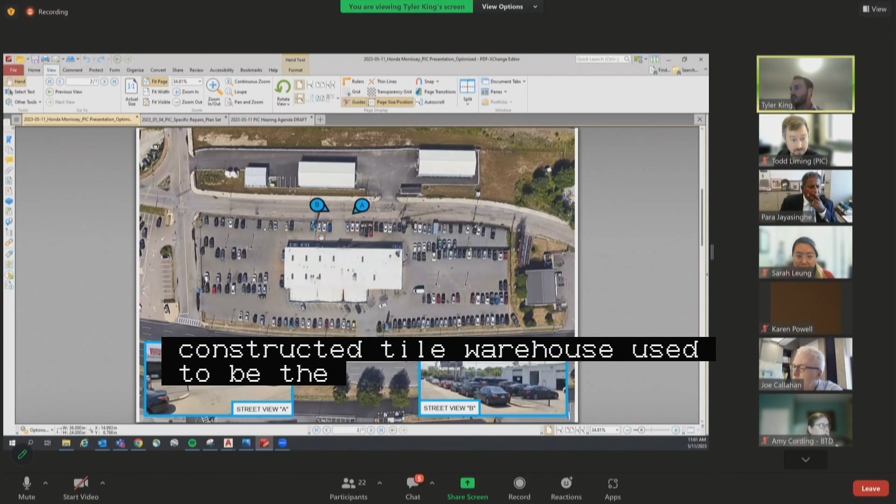Zooming in on the site, we're proposing specific repairs to the Freeport Street sidewalk and the Victory Road sidewalk in association with a proposed Honda dealership going at 720 Morrissey Boulevard. This is the existing Freeport Street sidewalk, a 5-foot asphalt sidewalk with a vertical concrete curb and street parking along the curb. Victory Road is also about a 5-foot asphalt sidewalk with an asphalt berm for the curb. There are two driveway connections on Victory Road, which are proposed to be closed, one just west of the existing Honda sign and one closer to Freeport Street.

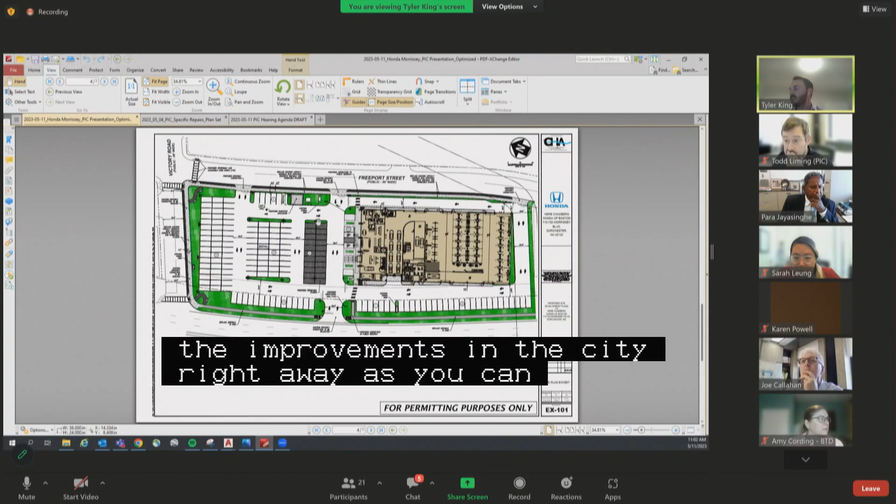This plan shows overall the proposed project and the improvements in the city right-of-way. Within the site, we have a significant increase in green space. Within the Freeport Street right-of-way along the sidewalk, we are proposing to increase the 5-foot asphalt sidewalk to 8 feet total, including a 3-foot furnishing zone and a 5-foot concrete sidewalk. Within that furnishing zone there will be proposed streetlights, and there's an existing hydrant that will be reset, with vertical granite curbing along that. On both Freeport and Victory, we are still coordinating the final design within the furnishing zone, and we hope to have that resolved by the next hearing.

Moving to Victory Road, we have a similar cross-section: a 3-foot furnishing zone with permeable pavers — I forgot to mention that Freeport Street will also have permeable pavers — and a 6.5-foot concrete sidewalk, again with streetlights within the furnishing zone. At the intersection of Victory and Freeport, we will reconstruct the curb ramps to make them compliant and perpendicular, and we are proposing a reciprocal compliant curb ramp across Freeport Street. We are also connecting proposed crosswalks to the existing reciprocal ramps across Victory Road. During construction, if any are found non-compliant, the contractor will rebuild them to come into compliance.

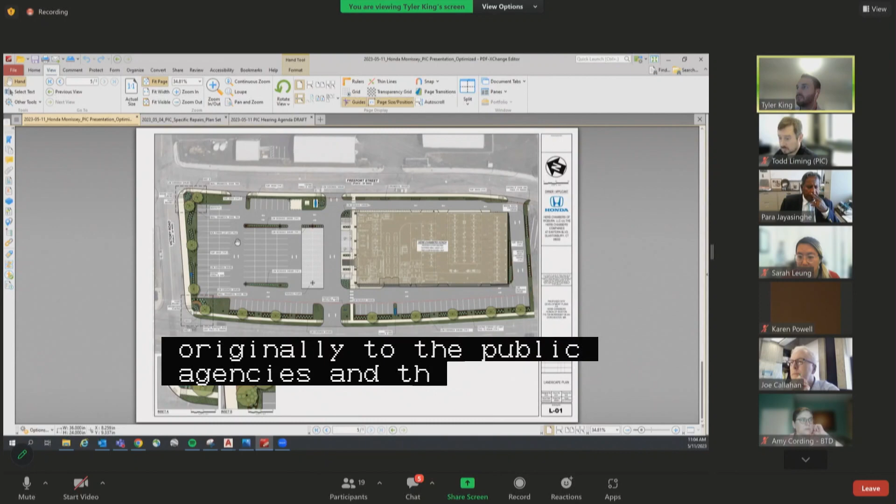Lastly, I wanted to show our proposed planting plan. The sidewalks on this plan are a little outdated—this is what we originally submitted to public agencies and utility companies for comment, and our design has evolved to what we just saw on the previous slide. But this gives a general idea of what we propose to install for plantings. We have trees along Victory and Morrissey as well as low shrubs, and on the corners of Victory Road and Freeport and Victory Road and Morrissey, we're proposing pocket parks for the pedestrian experience, including permeable pavers, shrubs, some trees, and a couple of benches.

With that, I'd like to open up to any questions or comments.

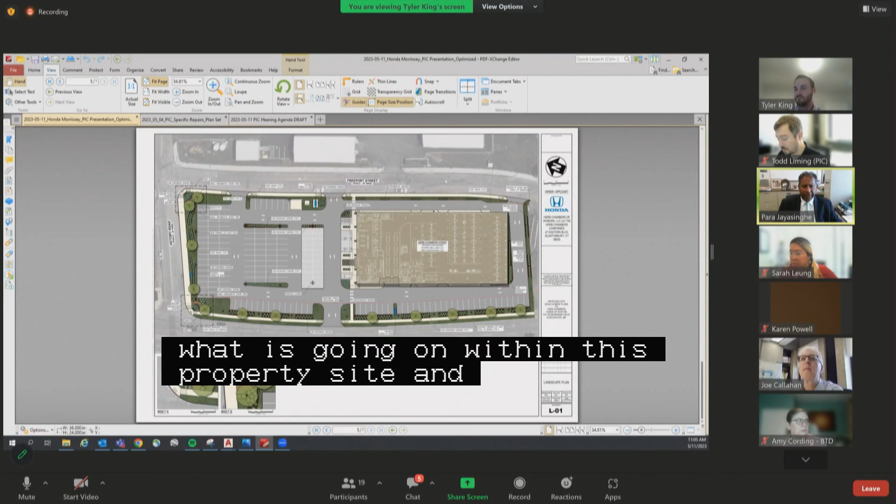Thank you, Tyler. My first question is, there is a Honda dealership there right now, correct? There's a building there. So is that building going to come down and something else going up? What I'm trying to get at is, will you need further utility connections to support whatever is going on within this property site, and if those utilities are going to get tapped off utilities on Victory Road or Freeport Street—I'll assume it's not coming off Morrissey. Yes, the existing building will be demolished—it's centralized on the site—and we're proposing a new four-story Honda dealership building. Drainage, water, and gas connections will all come off Freeport Street, and we are tying our sewer into Victory Road.

And Tyler, the reason I'm bringing this up—I don't have my minutes from the Article 80 review process which we all went through—is because Freeport Street, as you may know, serves a dual purpose for the city in terms of getting back-street traffic to the dealerships, but there are bicycle connections the city is looking at. So what I don't know, Tyler, is by the time you make all those connections to Freeport Street, a street that's already challenged today, might get even more interesting in the nicest way.

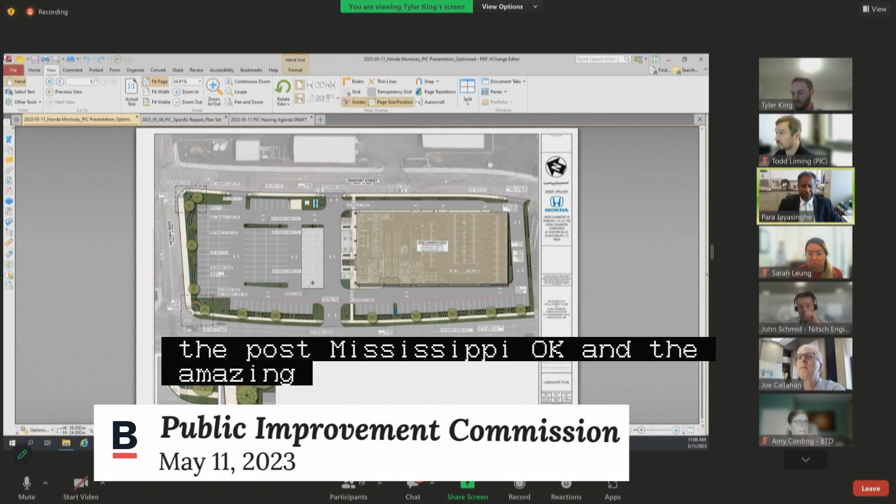Okay, and with the amazing Herb Chambers Company, it has a certain stature with the city, and it'll be a little bit awkward if the street behind this amazing project looks like a street that is not very complimentary of it. So it's just a very gentle way for me to see whether you all can do what needs to happen on the backside of it, because Freeport Street is in need of attention, and by the time you all are through, it will really need some attention.

So I'm just putting it out there. If you could speak to your clients and see what is it that they can do to make the surface of Freeport Street look a bit better than what it is looking today. And after you are done with your construction vehicles and the utility cars, it's going to look even less pleasant, if I'm making any sense to you.

And Todd, if you could help these fine people to coordinate with Stefanie Seskin to see whether there's some common ground which we can all achieve. I'm not trying to ask additional responsibilities, it's just that you all do good work, and if things can be complementary to each other, it's a win-win for all.

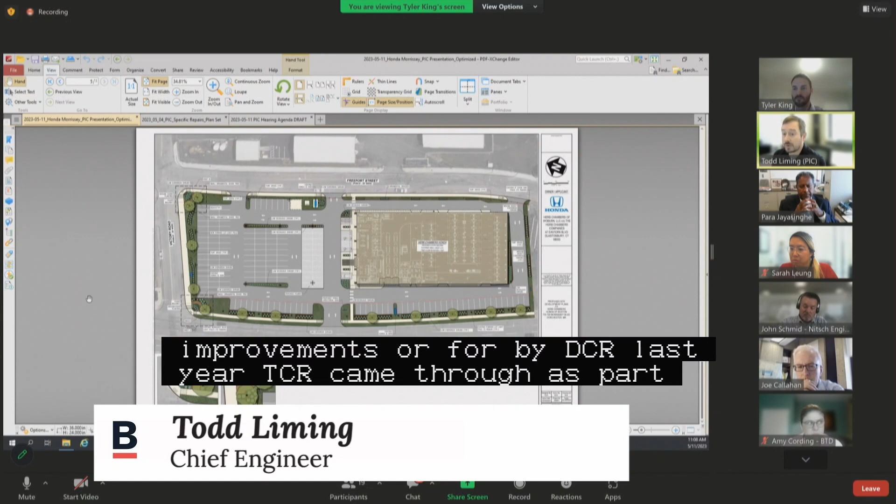Sure, and just as a bit of context, this Victory Freeport intersection is the same intersection which this commission recently approved improvements for by DCR. Last year, DCR came through and as part of their bike trail network improvements, they're redoing part of this intersection. Those plans have been shared with this project team, and this project team's design is complementary of those improvements that DCR is conducting. So everybody's aware of everybody and what's going on here, and we're doing our best to make sure all of those designs are coordinated. Thank you, Todd.

So Tyler, recognizing that the coordination is there, my little ask is your client, the project proponent, please take a look at how Freeport Street looks today and play that mind game as to how it's going to look after the construction is all done. And then it may not be very complimentary to the good work which your client is doing throughout the greater Boston area.

Okay? Understood, thank you. Thank you, Tyler. Any questions or comments to Mr. King by members of today, I'm sorry, my fellow commission members?

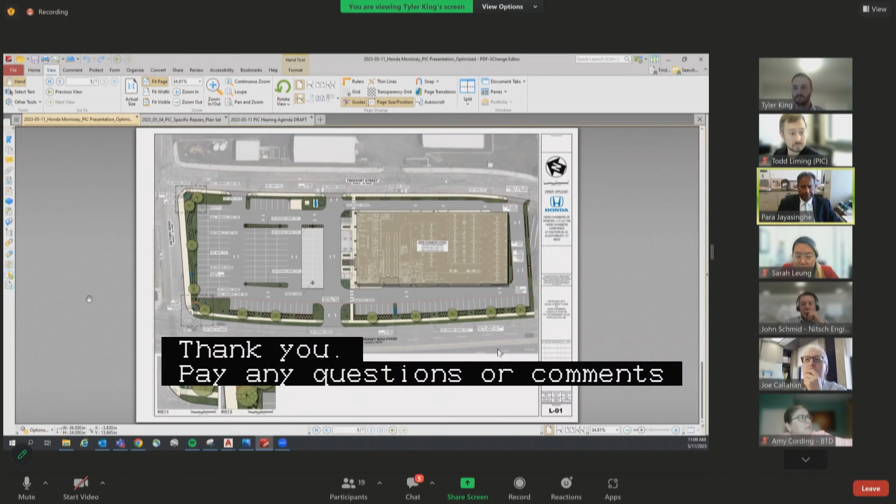Hearing none. Todd, you're okay with things on this end? And yeah, they're still coordinating with Parks and Public Works Green Infrastructure on what exactly these furnishing zones are going to look like, but they'll have an update before their public hearing.

Awesome. Do we need a maintenance agreement from the project team? Yes, yes, yep. So, yeah, and they've been in touch with Chung.

Awesome. All right. Any questions or comments by members of today's audience regarding the new business? Seeing or hearing none, we will mark you up for 2 weeks, which should take us to May 25th. Is that correct? Awesome. Thank you, Chair. Mr. King, we will see you in 2 weeks.

Second and last item on the new business agenda, 80 East Berkeley Street, Washington Street, Shawmut Ave, Boston proper pedestrian easement specific repairs projection license on a set of petitions by the Drucker 80 EB LLC.

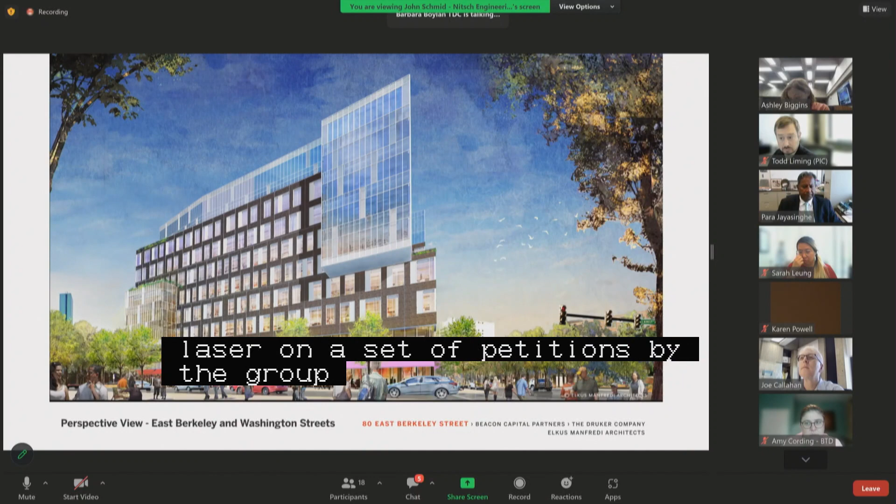Good morning. Good morning, Para and commissioners. Thank you for having us today. My name is Barbara Boylan. I represent Drucker 80 EB LLC, a joint venture, and the Drucker Company is the managing partner for this project at 80 East Berkeley Street. Thank you for your time today.

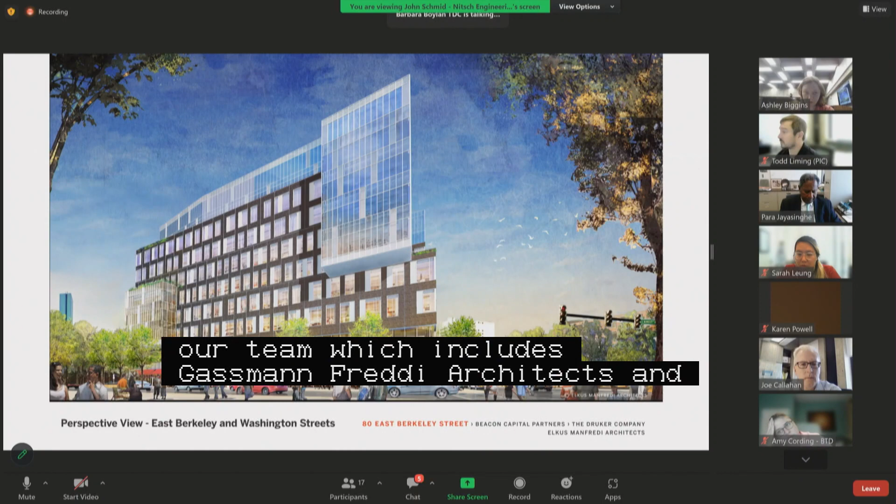Some of you may remember this project. 80 East Berkeley originally received all its BPDA Article 80 and other related approvals in 2013, 2014. Since that time, we filed a notice of project change in 2022 for time lapse and for the already allowable use of lab, office, life science. So this rendering depicted by our team, which includes Elkus Manfredi Architects and Mikyoung Kim landscape designers and Nitsch Engineering, is a project that has a 10-story life science office space with a ground floor of retail and affordable space. And it's located on 80 East Berkeley between Shawmut and Washington Street.

So I'd like to introduce our team today that will speak to the specific repairs and the improvements. I do want to note that we've had an extensive public process with the community. We always meet with the neighborhood groups, East Berkeley Neighborhood Association, South End Business Alliance, Washington Gateway Main Streets, Project Place, Castle Square, and Friends of Peters Park and the Community Gardens, all the people in the South End, as well as the big public meetings with the BPDA over the past year.

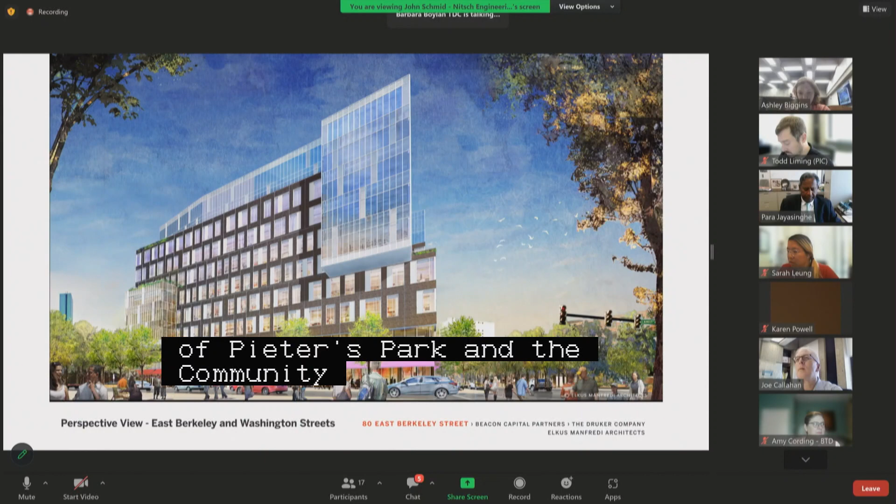So the community is on board for the public realm improvements and would like to see the project move forward.

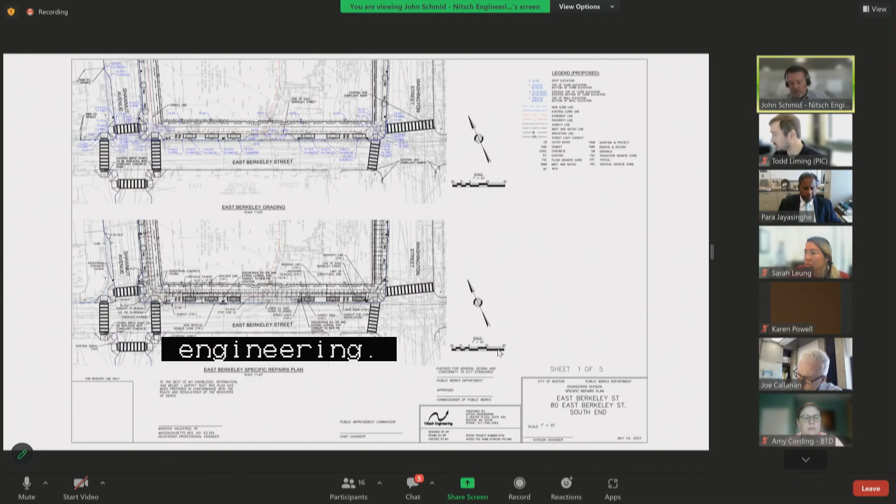Along East Berkeley Street, we are designing the street to be compliant with the Complete Streets guidelines. We have an 8-foot wide concrete sidewalk, some pervious pavers along the building face, and then a 7-foot wide frontage zone that consists of pervious pavers, street trees, and planter boxes. We also have a drop-off zone in front of the building, as the drawing indicates.

I'd also like to touch upon the crosswalk we're showing on Shawmut Street, south of East Berkeley Street. This has been drafted, but it's not designed. This is at the request of William Moose, and we are still investigating the feasibility of doing this, so I don't want to misrepresent the process to the board that this is a guarantee. We are working on this, and when we come back for the public hearing we hope to have a definitive design showing that this is feasible. But as of today, I can show you our intent, but I cannot commit that this is something that will be constructed.

On Shawmut Ave, we have an 8-foot wide concrete sidewalk, a 5-foot wide landscaped pedestrian zone with pervious pavers, 4 street trees, and 2 street lights and bike racks. I'd also like to note that we have a public hearing scheduled with the tree department for a tree removal hearing on June 1st. This development requires the removal of 3 existing street trees on Shawmut Ave, and we're replacing those with 4 new trees.

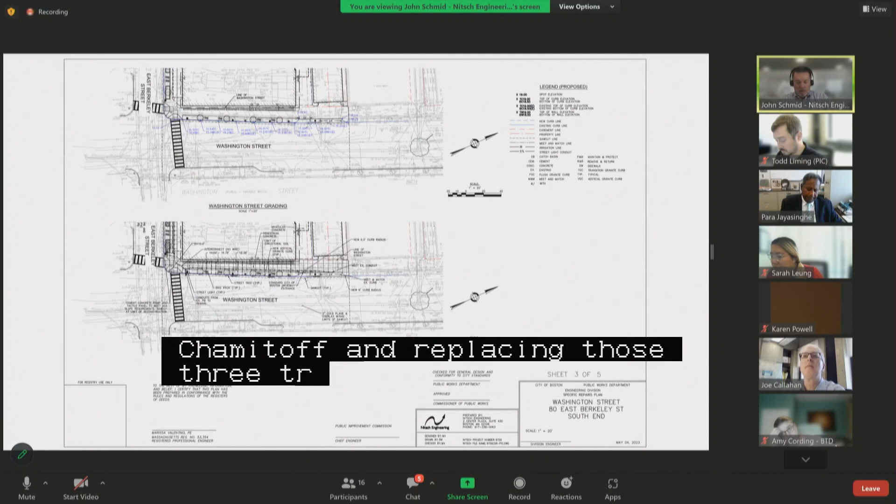And then along East Berkeley, along Washington Street, we have 4 new trees. We have an 8-foot wide concrete sidewalk, and 6-foot pervious pavers as well. We are also in the process of confirming that the reciprocal ramp on Washington Street is compliant.

For pedestrian easements, in order to provide the public realm that is in the best interest of the community, we have a pedestrian easement proposed on East Berkeley Street, approximately 4 feet wide, and then a pedestrian easement on Shawmut Ave that is approximately 2 feet wide.

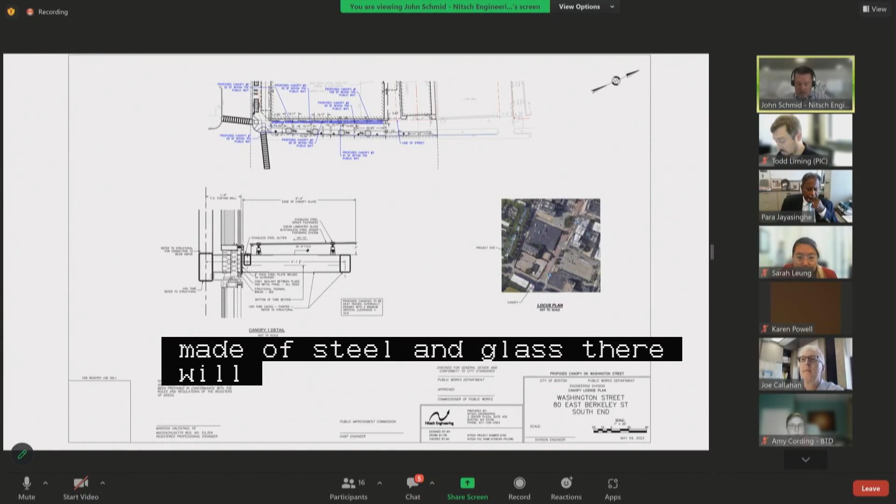And then finally, we have the canopy license, which is a series of 6 canopies along Washington Street. They're made of steel and glass, will be heat traced and internally drained. They are greater than 10 feet above grade, and project less than two-thirds into the public way.

Any questions? John, so today is May 11th, and normally when we hear a petition of this nature, we would schedule this for the next available hearing, which would be on May 25th. However, with your tree hearing scheduled for June 1st, I think it would be premature on this Public Improvement Commission's part to schedule a hearing subject to a future tree hearing.

Yes, I completely respect and understand that, and that has been the city's policy for a very long time. Barbara, please add to this commentary.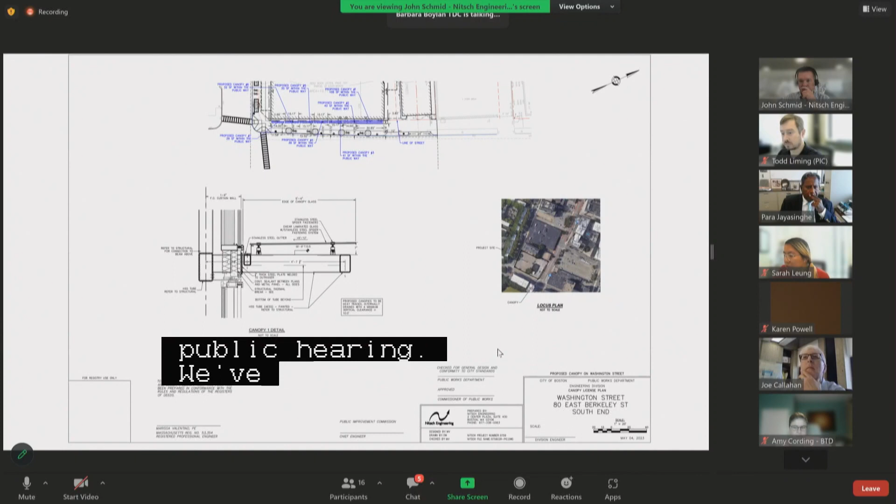Sure, Para. I was wondering if there is, with the commissioner's approval, a way to proceed to the public hearing. We've been in touch since the last hearing, April 25th, when we became aware that we had to be in front of a tree warden. We've been in contact directly with Max Ford Diamond. He has gone out to see the trees already. We have a removal plan that we've talked to him about, and we're sending it again today. It shows the improvements of 4 new trees on Shawmut.

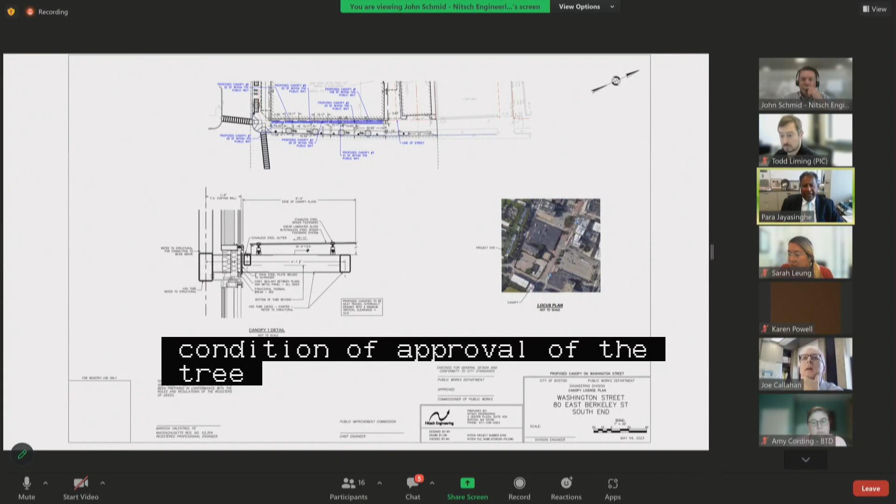The difficulty with this one, Para, is timing. The parks or tree warden hearings are only once a month. I was wondering if there's a mechanism to advance to the next PIC in May for review, with the condition of approval of the tree warden public hearing on June 1st. I don't know if that's possible, but we're in daily contact with the tree warden and acknowledge we will be on the June 1st public hearing.

As much as we want to help these amazing projects come to fruition, having been here for a couple of days, it would not be appropriate for us to pre-position another hearing based on one hearing. That would not be the appropriate administrative process for us to use. It's also possible that there may be concerns by a totality of people.

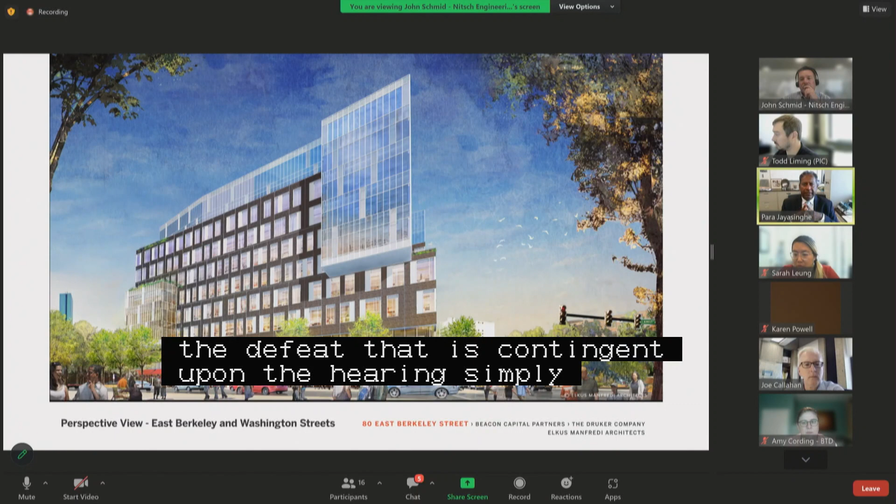So Barbara, as much as I would like to give consideration to your request, with the city's heightened awareness and sensitivity towards the issue of trees and very mature trees in the city, I think we'd be severely out of step for the PIC to take any action on the 25th that is contingent upon a tree hearing, simply because of the nature of the hearings. All it's going to do, Barbara, is push things to the next hearing, which is June 15th, and that is my learned guidance, still recognizing the utter amazing projects which the Drucker team and the whole project team does.

We appreciate that part, but I feel very uncomfortable positioning another independent body's public process, and that whole subject matter has been elevated to the highest levels within the city, that topic being the tree canopies and the survivability of the trees.

Sure, I acknowledge that and appreciate your response. Is this an action then that could be on the June 15th hearing? Absolutely. We can schedule all of this stuff, all your 3 petitions, the pedestrian easement, specific repairs, and projection license, all as presently proposed for the June 15th hearing.

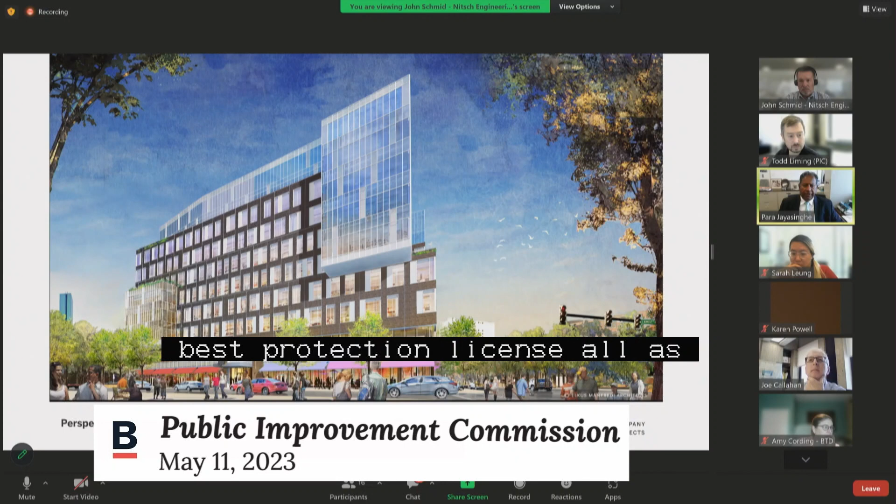With the caveat that if any changes are to be made on the specific repairs plans, hopefully between June 1st and June 15th, you can make those changes, or John will be working overtime. But John's quite capable of doing that thing. I know, thank you, Para.

Para, could I ask for this consideration? A lot of what's driving this is the code change on July 1st and getting building permits filed prior to that. This building is bounded by public streets, so I don't necessarily believe, and if the attorneys on board can speak to this, we need specific repair approval for filing of the building permit because it is bounded by public streets and public access. But I do think we may need approval for the canopy licenses because that is part of the building.

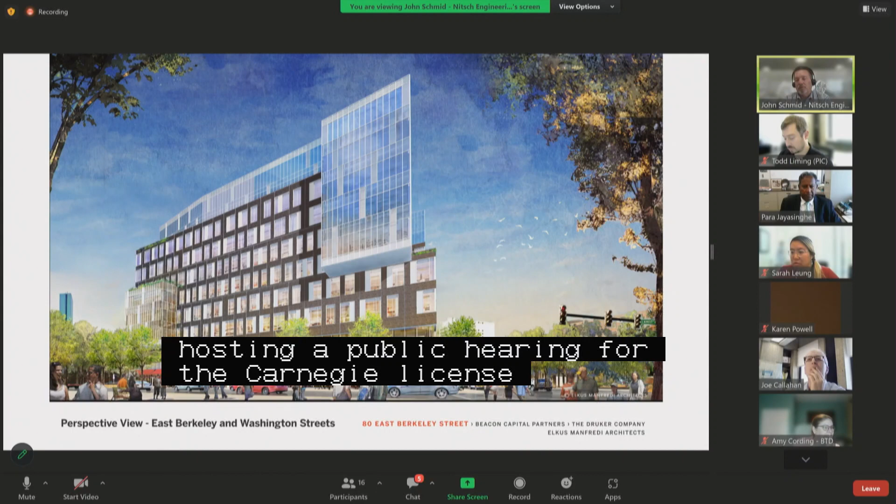Would the commission consider hosting a public hearing for the canopy license on the 25th of May, so we could close that out, and then have the public hearing for the specific repairs on June 15th? Sensible question, why do I use words like sensible? Meaningful question on your part, John.

I just need a little bit of guidance from Todd. Todd, does that complicate things in terms of how the project can be viewed by external parties? John, you know how people are so clever at picking up two words from a ten-word sentence I make, and then they misconstrue things. I think we are really good at that stuff, and I'm just deadly afraid of how it can complicate things.

Yeah, I don't want to put anyone in City Hall, in your office, in an uncomfortable position. I would just ask for that consideration.

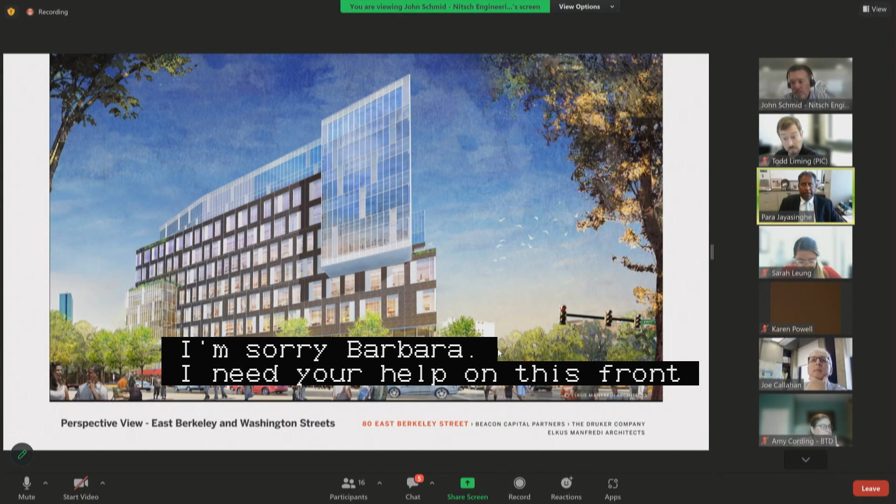I think, Miss Boylan, sorry, Barbara, I need your help on this front. Unless there is a reason that where the Earth is going to stop rotating, the more comfortable, clean thing would be for this whole petition, all 3 aspects of the petition, to be heard on June 15th, so there is nothing lost in translation as to the action that is to be taken by the PIC, unless you are telling me that your whole financing is all going to fall apart because the canopy license doesn't get approved by May 25th.

Thanks so much for talking. Hi, David, good to see you. Hi, good to see you. Good to see you, we appreciate that you're allowing us to have this conversation.

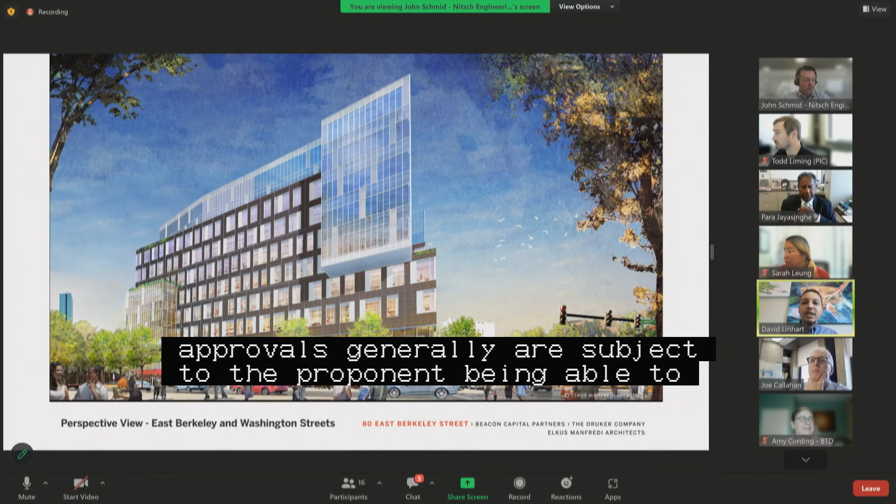And I might just add a few more words if you allow us. And then, of course, respectfully, we appreciate where you come down on this. But it might be worth considering that all approvals generally are subject to the proponent being able to achieve all other approvals that are needed. Like when we, as a project, received BPDA approval, there are certain public realm changes or improvements that we're expecting, and it's understood that's subject to obtaining any other necessary approvals, and maybe that's an avenue here. Maybe that's what is approved.

Or at least what comes forward for a public hearing, wherever we end, at the next scheduled PIC meeting, it could be understood that that approval would be subject to achieving other approvals, such as a successful tree warden hearing. So that might be an avenue to move forward. Of course, I've been at public hearings where there were reasons to extend that another 2 weeks. We could schedule, see if we're all comfortable, and otherwise still have the option to move another 2 weeks forward. So being able to come back in 2 weeks would be meaningful. I just thought I'd put that out there as we're talking about it.

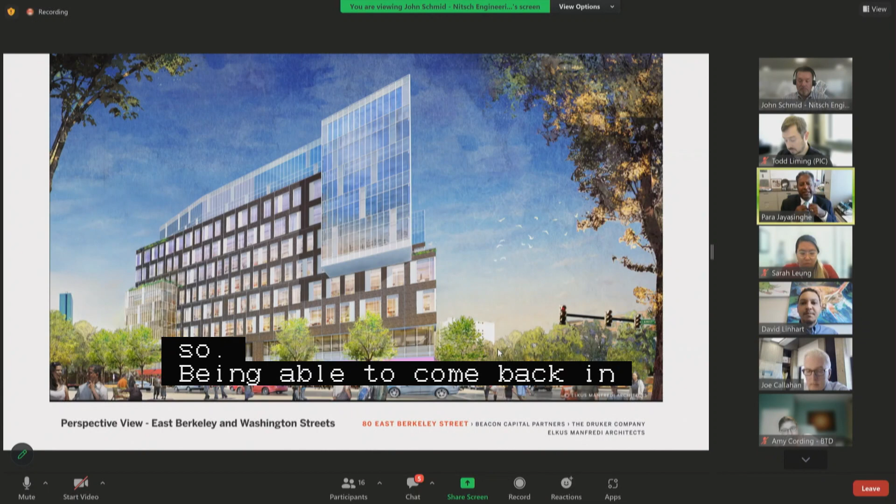Thank you, David. I truly appreciate the thought patterns you're sharing on this conversation. It's a value judgment we're taking right now, where the tree hearings, but assuming it can go alpha or bravo, yay or nay, one of those things will impact the specific repair plans. So the way I'm seeing it, we somehow brought you all under new business with this issue still hanging. My preference over the last 25 years is to make sure everything is nice and clean so we can go through PIC. So here we've got this scheduling issue.

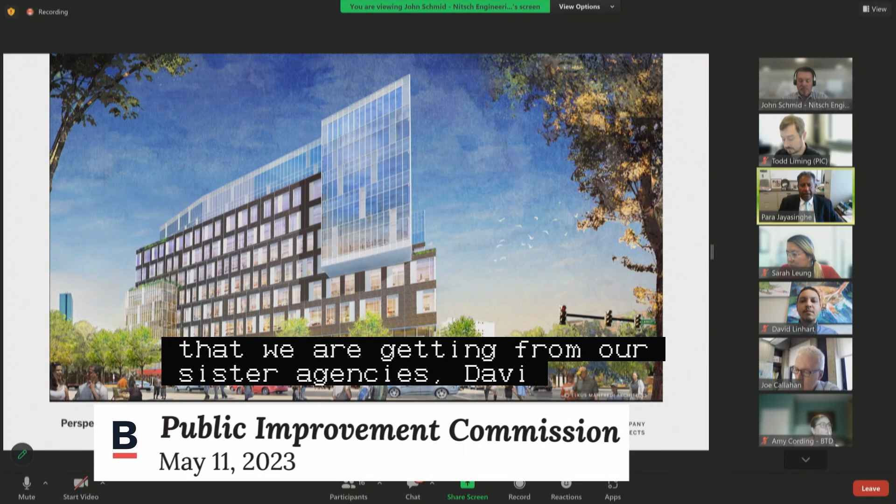Otherwise, Mr. Liming's guidance to me would have been this wouldn't have even come to new business. So considering the importance of tree issues and the feedback we're getting from our sister agencies, David, I think the best thing is for us to schedule the public hearing for the 15th, which gives you time to adjust the plans if needed. Otherwise, I'll be opening a hearing on the 25th of May on issues where we know today that your tree hearings are on June 1st. So I've seen it both ways, weighing risks, and my thought patterns are that I'll still seek the guidance of fellow commission members if they have something to say.

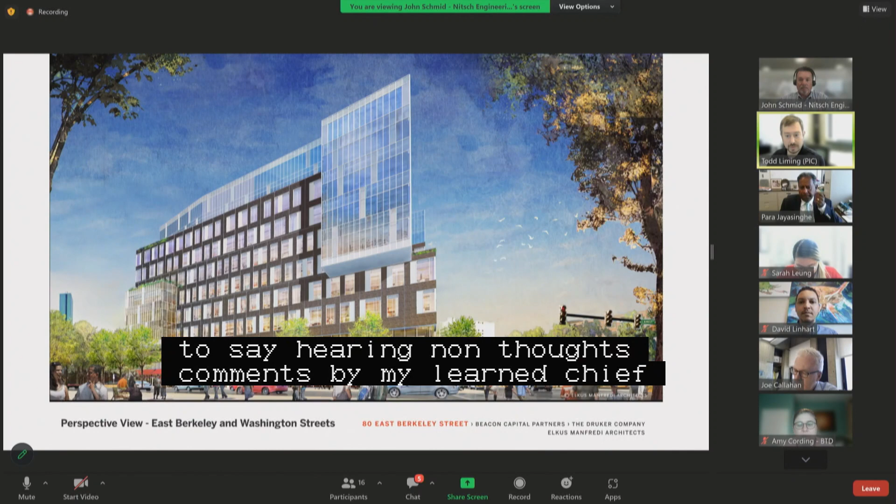Hearing none, thoughts, comments by my learned chief engineer from the PIC Commission, Mr. Liming? Yeah, I'll say my preference is always to keep all action items together. It's a lot cleaner. I think the other big hurdle here would be trying to pull a sidewalk deposit permit from Public Works without approval of the specific repair plan is darn near impossible. And that sidewalk deposit permit is something ISD would certainly be looking for when considering issuing a building permit. So I think having that trail behind maybe wouldn't be the easiest thing to do. I think bringing everything back on June 15th probably makes the most sense in my own opinion.

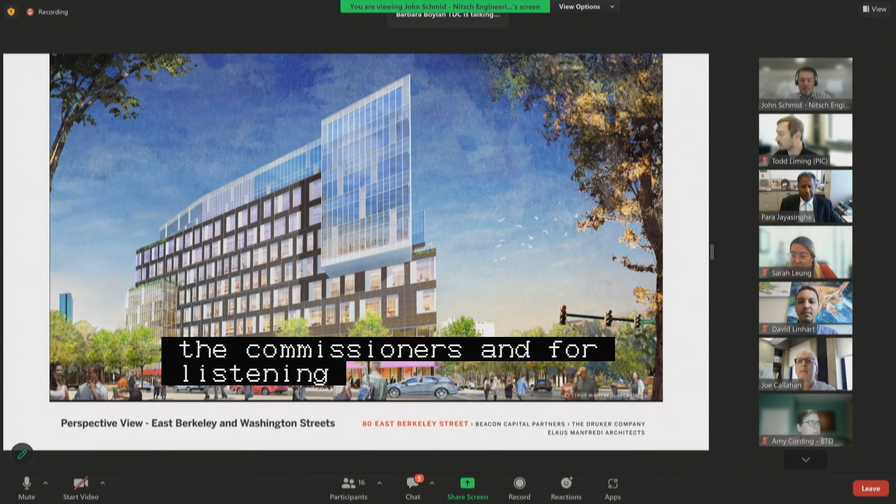And thank you both, Para, Todd, and the commissioners, for listening to us. I appreciate that, and I do understand. I don't want to unnecessarily burden anyone. It sounds cleaner, and Para, with your experience, you know how this process works best. So I respect that, and thank you, and we'll look to be on the June 15th PIC, and we'll continue to work with you and your department and the tree warden so that you're all up to speed on exactly what's happening on June 1st.

Yes, thank you, Barbara. Again, if your team can expend all the necessary energies to focus on the tree hearing so that its impact on the paperwork you've submitted to us is as least impactful as possible, and should it need to change, make those changes so it doesn't confuse what we'll be advertising. Todd, did I say that? I know I said that thing. Is there anything else that needs to be amplified to that point?

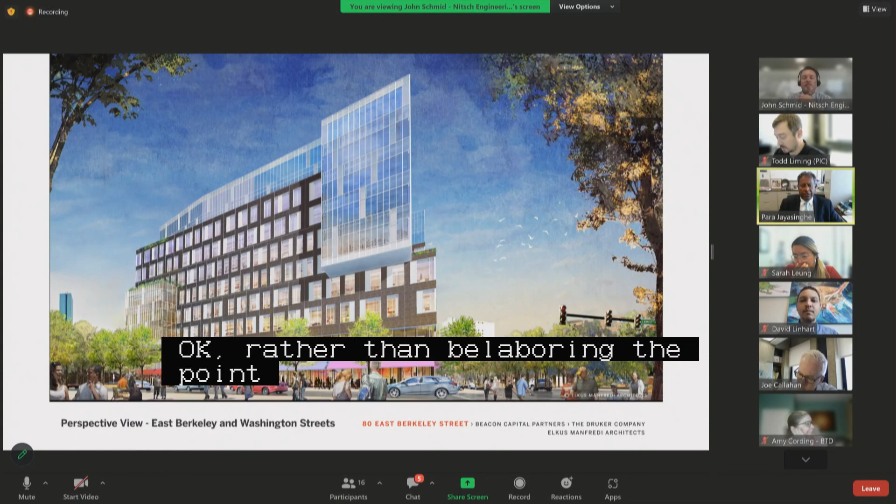Okay, rather than belaboring the point more, you all, and when I say you all, that's not a polite way of saying it, the petitioners, the Druker companies, you all do amazing projects in the city. There's a legacy there, and the project team is a great team. So we want to help you get there in the cleanest, fastest way that makes sense with all these little dangling participles. Thank you, Para. Very much appreciate that.

Thank you. So that all being said, we will mark this up for the public hearing coming up on June 15th, and wish you all the absolute best in a very successful tree hearing that minimizes any impacts to the paperwork you've already submitted. Okay? Thank you so much. I appreciate it. Awesome, thank you.